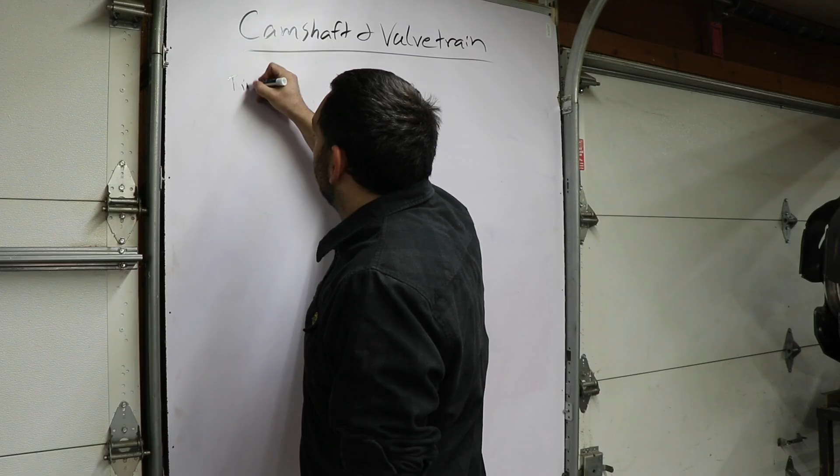The valvetrain consists of everything from the crankshaft to the valves. So as we go through the system, that's going to be our timing set, whether this is a chain or a belt, the gears, that kind of stuff. That's going to directly drive our cam, and our cam is going to have lifters or followers.

If we've got a lifter or pushrod style, next up is our pushrods. If we're overhead cam, usually our followers are acting directly onto the valve at that point, or if it's just like a lifter and bucket setup, it'll be directly at that point.

But if we're pushrods, we've also got our rocker arms, which would be the same as our followers if it's an overhead cam deal. And then now we're acting on our valve. These are the direct parts that the forces are moving through to get that valve to open.

But along with that, we've got our spring, retainers and locks, or seats for our springs between the spring and the head if we need them. Cast iron heads usually don't need them.

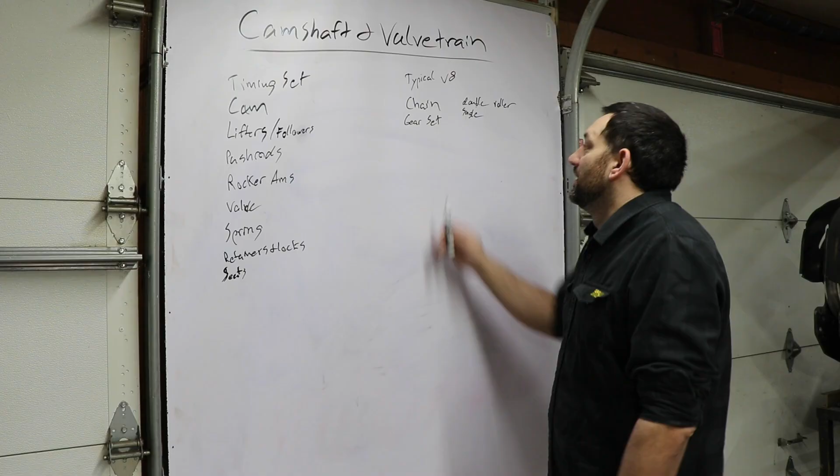You can still get gear sets. They are a lot more picky about how they get set up, like the spacing's got to be right. They're also noisy because they're straight cut gears, so that's why you get kind of a supercharger whine from them. And they even got different cuts where you could choose how loud the noise is, kind of a thing.

A lot of times this is not a choice we make nowadays, simply because a gear set like this also transfers harmonics. Now, harmonics being vibrations and just the way material is moving around of the crankshaft and rotating assembly moving makes a harmonic into that system.

Well, if we're gear driven the whole way, we've actually got metal touching metal all the way up to our camshaft, and those harmonics can travel up into the camshaft and therefore into the valvetrain. And I've never actually gone through the whole process of finding out, but plenty of people that have had way more time and money to invest into racing programs have seen and found that those harmonics can get up into the valvetrain and either break parts or cause valve float or just problems in general.

So really, a gear type set is not something we would choose in this day and age, but there still is kind of a place, especially for nostalgia reasons, or just because somebody wants to, as far as this stuff is concerned.

There's also a belt drive. Belt drives are definitely more of a modern introduction, starting out with OEM cars. You can still get chains and belts in OEM stuff there. It's just kind of what the manufacturer decided to do.

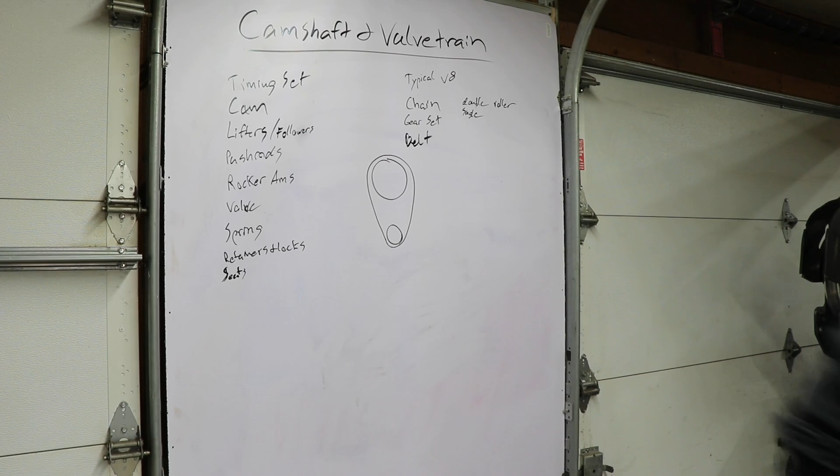The belt is probably a little better at being less flexy, just because the weight of the belt itself is much lower than the chain. So the inertia forces coming off of a small gear or crank gear to our cam gear, as we've got our chain or belt going around, everything's rotating in this direction if we're looking at it from the front. There are some engines that spin the other way, mostly in front wheel drive applications. I believe it depends on which way the motor's laying. Some spin the other way, but your typical American V8 is going to spin clockwise when looking at it from the front of the engine.

The belt or the chain has weight, and because the crank is turning, it's really pulling this edge very tight because of the drag of the valve train system and the cam itself. But when it comes around, we've got the chain weight, and if there's slack in the system—because there's always going to be just a little bit—it's trying to throw the chain out this way. The same thing happens with the belt, but because the belt is lighter, it's going to be thrown less.

In theory, what we're trying to do is make sure the slop in the system is kept to a minimum, because as this pulls tight, the chain or belt might actually start out—if it was not running—in a place like that where it's even on both sides.

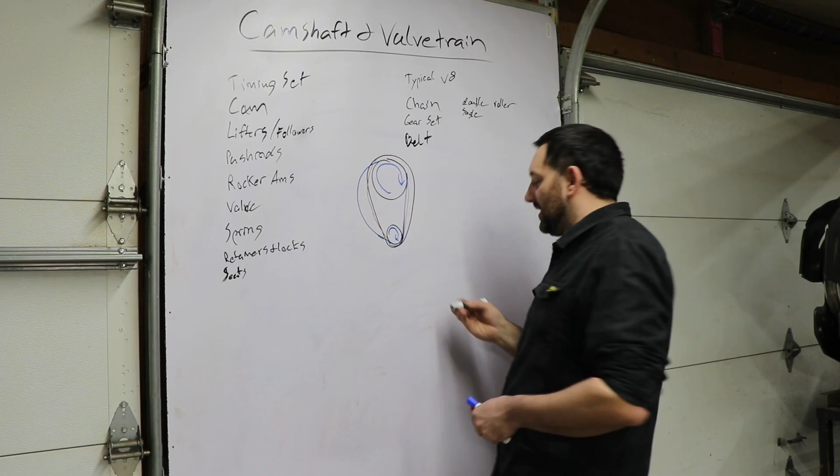As we're accelerating, we're pulling it tight, and we're getting slack on this side. But if we're lifting off the gas, slowing down, shifting a gear, whatever, now all of a sudden the crank is going slower than the valve train, and it reverses. We now get pulled very tight on this side, and we're being thrown with slack on the opposite side.

Now we're talking about trying to keep this to a minimum. It all depends on how the chain or belt fits, because there's a very specific center to center distance between our crank and our cam that is supposed to be maintained. But if we've done any machining to our block, whether it's line boring or line honing, we might be making this distance shorter, or maybe it was a little bit short from the factory—where now our center to center distance is short, and that makes more slack in the system.

Because of that, depending on the application, you can get some like minus-.005 or minus-.010 timing chains, where just one link is ever so slightly shorter, or however they make up that difference, to bring that in and tighten things back up. It's not super common to be needed.

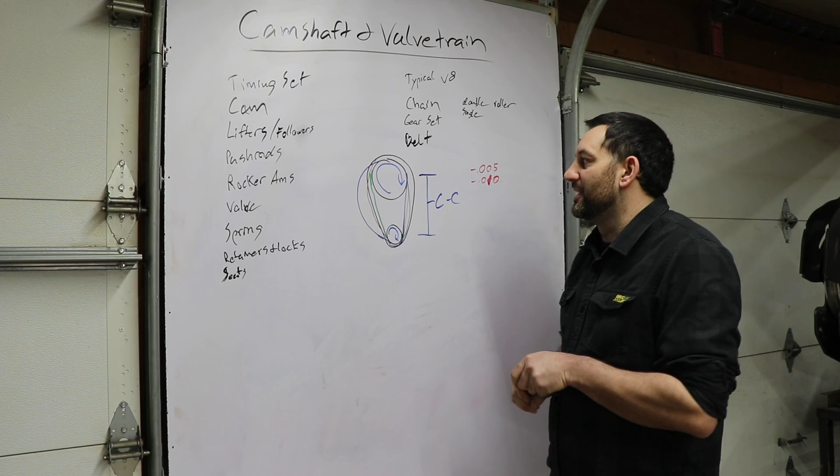Out of all the engines—I've probably built 100 engines over the years of different types—I think I only had 2 that I really needed to go to a shorter chain on, because there was just too much slack in the system, with the exception of a small block Mopar. Every single one of those is loose. You can't get a shorter chain, so they actually have an add-on OEM part.

I think it came out for the Magnums, but it fits on the older ones too—it actually puts a spring-loaded chain guide in, similar to an overhead cam setup. The overhead cam's got multiple guides, and it's just got a spring here that adds pressure to the chain to make sure it's always pulled tight. Actually that's a great setup because it takes up a ton of slack on a small block Mopar—so much slack that it would actually be considered junk on something else.

This was at least a thing 15 years ago when I was doing a whole bunch of them, and these were actually getting kind of hard to get. So I don't know what the situation is nowadays.

I've thought about trying to design something like this to add to my Oldsmobiles—not because the chain is loose, but because if we can add just a little bit of tension, we can control it that much better. And what I mean by controlling it is because of our slack, the way it's moving between acceleration and deceleration, we could be getting a couple of degrees of variation in our camshaft versus our crankshaft, ending up plus or minus—plus being we advance, or we retard on the camshaft.

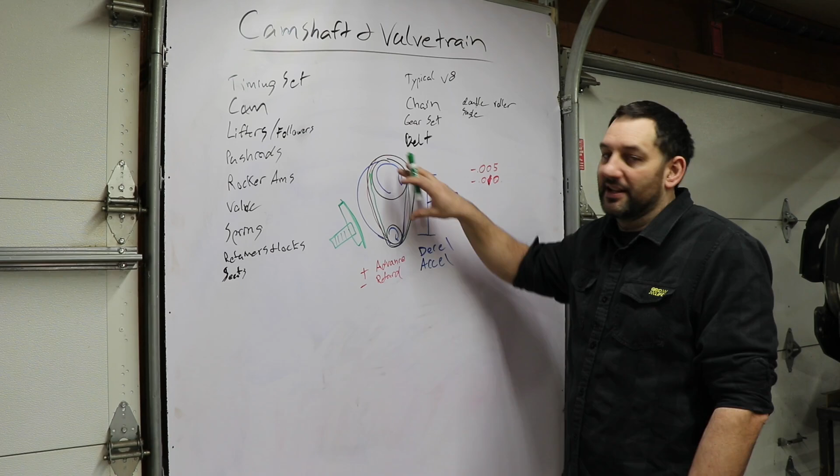It's variable valve timing, basically. Newer cars, like a newer LT style GM engine, do this advance and retard on the camshaft hydraulically, changing it so it can build a little more power, either low end or mid range, high end, moving it around. That's something they designed and probably did lots of dyno testing for, to see at what RPM the camshaft should be in relation, to maximize low to mid range power.

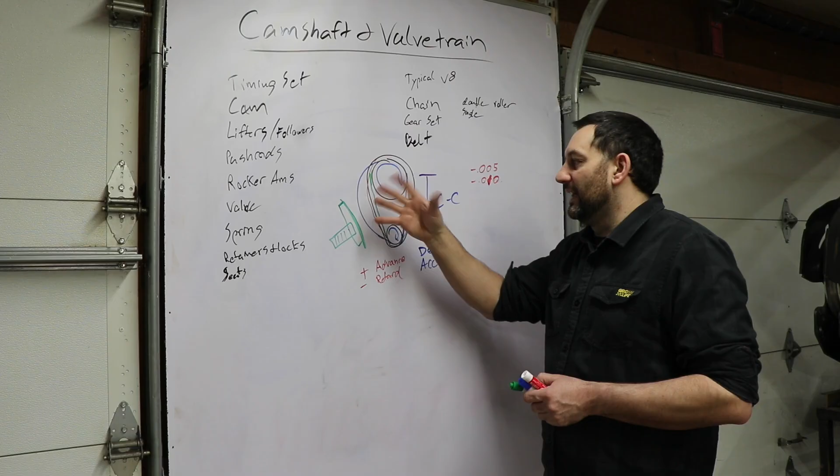But the big thing is, we're building a performance engine. We don't want it just willy-nilly going wherever it pleases, because especially at a steady state RPM, like cruising down the highway, you'll have a slight accel, slight decel. You may not notice it in the car, but it might be enough that it's just rattling back and forth if the timing chain is loose enough. It's not good for the engine as a whole, and it creates a lot of unnecessary movement in the system. So we really want our timing chain, gears, or belt set up so we have as little lash in the system as possible.

Now once we've got the energy moved up to our camshaft, and it's rotating in sync with the crankshaft, we need to know what our cam is actually doing.

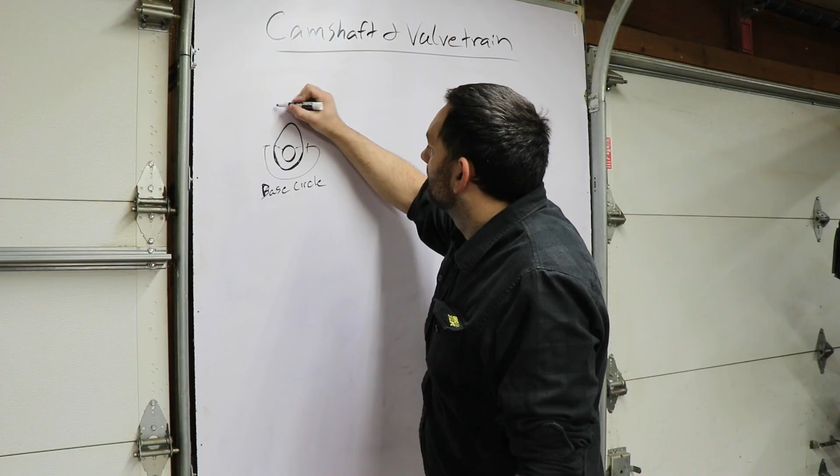A cam is just a shaft that has an eccentric lobe on it. This lobe area is what creates our valve lift. This area around the bottom that is not our lobe is called our base circle, and our base circle is just the area of the cam where the valve is closed. Our lobe is valve opening.

I'll start with the base circle, because this is where nothing is happening as far as that valve is concerned. Depending on the system our cam utilizes for controlling lash, we've got two different types: solid and hydraulic. These are the two different methods, with solid being nothing moves, we're actually going to have a set amount of lash, lash being just space in the system where our parts are not touching each other.

Hydraulic, our parts are always touching each other, and it's just the oil pressure that keeps them pushed in contact, but not so high that it causes a valve to open with that pressure. So here we have basically zero lash in the system, because all of our parts are touching.

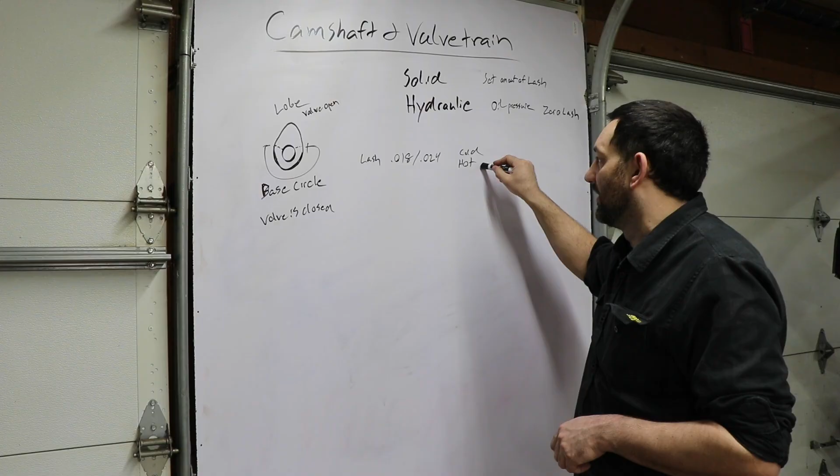The cold versus the hot takes into account the expansion of all the parts, like the entire engine. The block and the head are going to expand and contract with temperature, as will our timing set, camshaft, push rods, lifters, rocker arms, and valves. Everything expands and contracts with temperature, so this number changes based on whether you're setting it cold, not running, or with the engine up to operating temperature. Your cam will specify one or the other, if not both, as far as lash settings.

So with the two numbers, it's going to be 18 for the intake, 24 for the exhaust. The reason the exhaust is usually bigger is because our exhaust valves run hotter, and therefore grow in length a bit more than the intake valves do, making a difference there. There's just more heat in that part of the cylinder head.

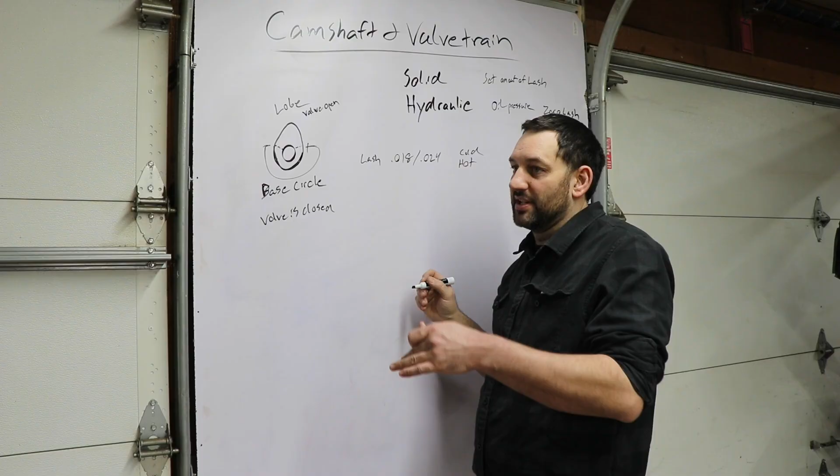Now for our hydraulic systems, since we're running zero lash, it's not just tightening up your rocker arm until your pushrod bottoms out with no more wiggle. That would be zero lash if we're using a solid system, and it's also zero lash if we use a hydraulic system. However, because we're wanting to use the hydraulic system, our lifter...

...has a couple of parts to it. There's a top portion that's got the cup that the pushrod rides in, and then there's a couple of parts, well, there should be one oil disc in there, I believe, and then a spring.

Now this usually has an oil port of some sort in the side, and that's getting oil supply from the block or the cylinder head or whatever, because even overhead cams sometimes have the lifters. They sit down the head and push up on the follower/rocker arm to hold it tight against the camshaft. So there's a couple different ways that all this stuff goes together. It depends on the engine.

But it's being supplied oil pressure from the engine, and that just fills up this reservoir space between this disc and our cup that's holding the pushrod, or that's a pin if it's an overhead cam follower, because it's got a pin sticking out the top to push on the rocker arm. And we're just filling that system.

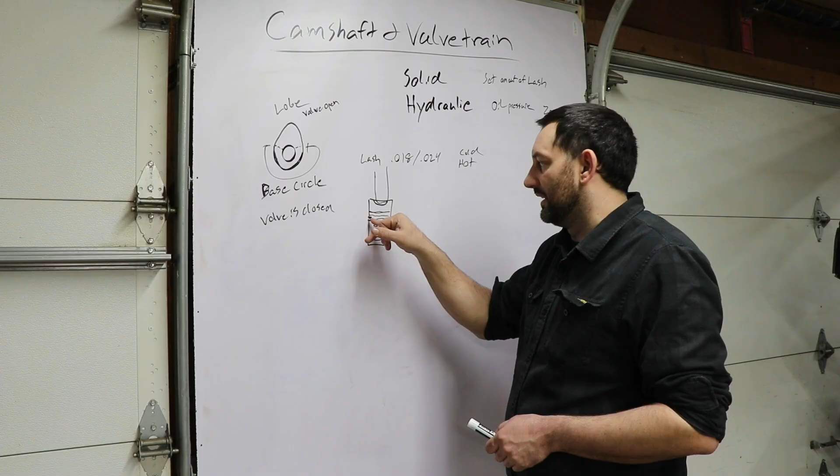The disc has a metering hole in it. It's a fairly small hole in the side of the lifter, and we're just metering the amount of oil that can get in there, filling the space so that our cup on top can't move up and down inside of the lifter itself.

But when we're first putting the engine together, if it's an overhead cam setup, you really can't adjust anything with that beyond being able to add shims in the hole below the lifter body, therefore raising it up, therefore depressing the cup further into the lifter. That's one way to adjust it to a tighter setup.

Otherwise, with a pushrod V8 system, we've actually got our rocker arm up on top. Then we're tightening it and pushing down on the pushrod to push it farther into our lifter body as well. It's accomplishing the same thing.

Typically we're going to be talking a quarter to half turn when we're talking V8 pushrod stuff. So all that is, we're holding onto our pushrod, tightening our rocker arm, and as soon as all the up and down slop goes away in our pushrod, it means we've finally got the pushrod to hit the cup, but the cup is still at the top of the lifter. Then we'll turn our rocker arm, polylock or nut, another quarter to half a turn to depress it into our lifter a little bit.

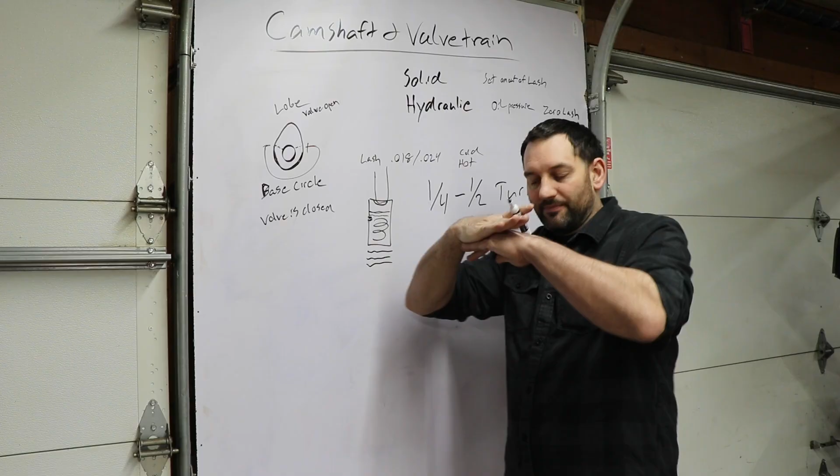Then when the engine runs, that fills with oil. It kind of locks everything in place. They're very difficult to compress after that. That's why it's able to open the valve, and that's because of the metering hole in the disc. It's basically locking the oil in place. It lets it flow in, but it doesn't let it flow out very quickly. So it locks it in place so that while the engine is running, it's holding in the correct position to open and close the valve without having any lash in the system.

These can be set tighter. I think the argument is, depending on how good the lifter is or what that metering plate size actually is, when you get into large performance camshafts the hole is probably still too big, or what's happening is we're getting spring pressures big enough that we're collapsing our hydraulics trying to keep our lifter on the camshaft lobe. So if you run it tighter, it can only collapse a little bit. But on that side of it too, you can also get into situations where it's not in its correct range, and maybe it'll lock and you're going to get slop in the system anyway, or it's not good for the lifters. You can just run into problems.

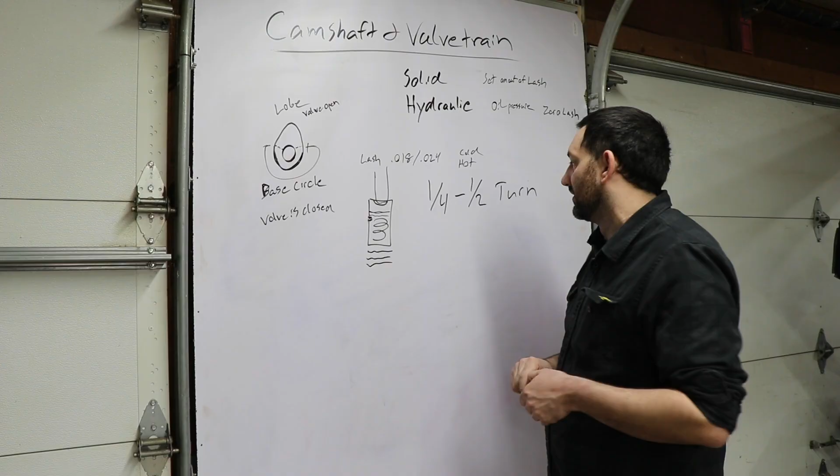The quarter to half a turn is a good place to be. I prefer to be to the quarter turn side, just barely depressed in there.

We make sure we get plenty of oil to fill it up, and that quarter turn buys us just a little bit of space to take up wear in the system over time. Because we're building a performance engine, it's not going to see 200,000 miles of use, so we're probably not going to see that much wear before it's back apart to check on it. But that's the benefit of a hydraulic over the solid: you've got no lash, so you don't have noise from the valve train. It's got its own built-in way to take up wear over time, and it's just an overall zero maintenance system.

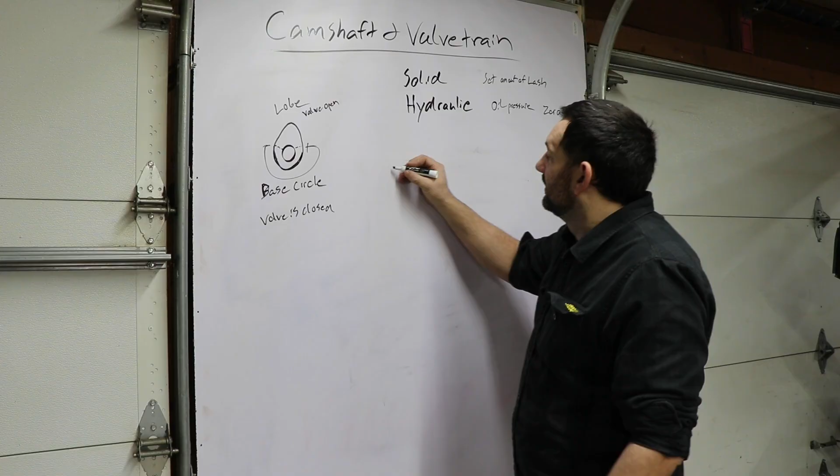Solid cams, on the other hand, we have our initial lash that we set. But it is adjustable because we're setting it. Now, why we might want to adjust the lash depends on what the engine wants.

So let's say we picked a cam that's got 256 degrees of duration at 50, and 264 on the exhaust, at 50 being at 50 thousandths of lift. Well, if we have lash that is 18 and 24 like it was before, but our cam has this duration, let's say it's 550 and 570 lift. So these are how big our lobes are from base circle to the top of the lobe, after factoring in the rocker ratio. So that's what we're going to see for valve lift.

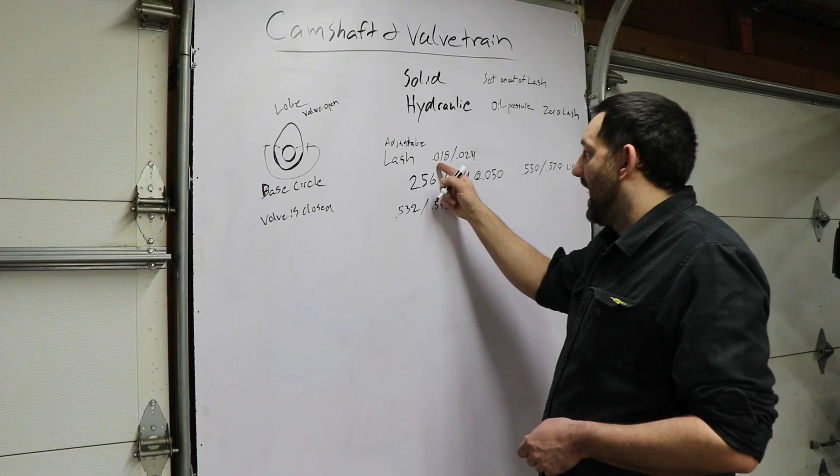Now let's say this cam is a little too big for our engine. We can increase the lash. But what's going to happen when we increase the lash is we're both going to reduce our valve lift, because there's more slop in the system -- slop being lash.

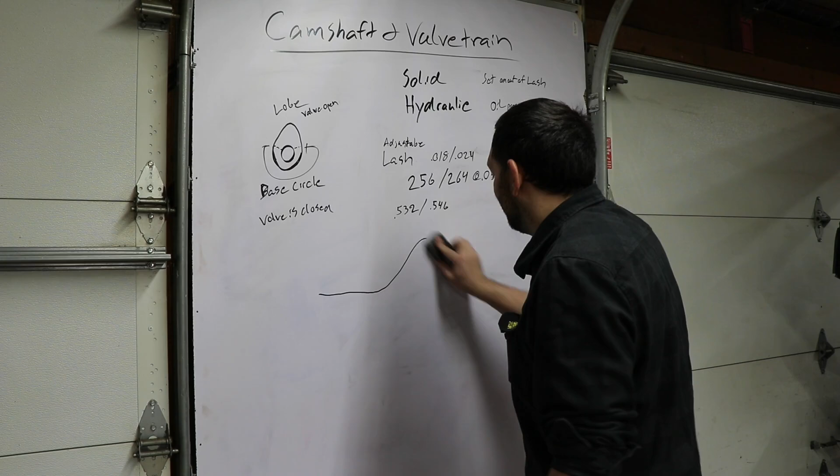And we're also going to reduce our duration. That may be kind of hard to think about, but if we take our base circle and our lobe and put it into a graph form, we've got our flat base circle, and we've got our lobe back to our flat base circle. I've drawn an asymmetrical camshaft lobe here, which is a thing -- they're not always consistent, but there's symmetrical and asymmetrical. Most stuff is symmetrical.

So let's say that this is what our cam profile is going to be with a hydraulic system. Since there's zero lash, it is going to be running exactly what this profile is. And this lobe in a hydraulic, if we put the same lobe on a hydraulic as we do on a solid, these numbers are going to be slightly different even though it's the exact same lobe, simply because we've got our lifter directly on this line to open our valve, versus when the lash is factored in.

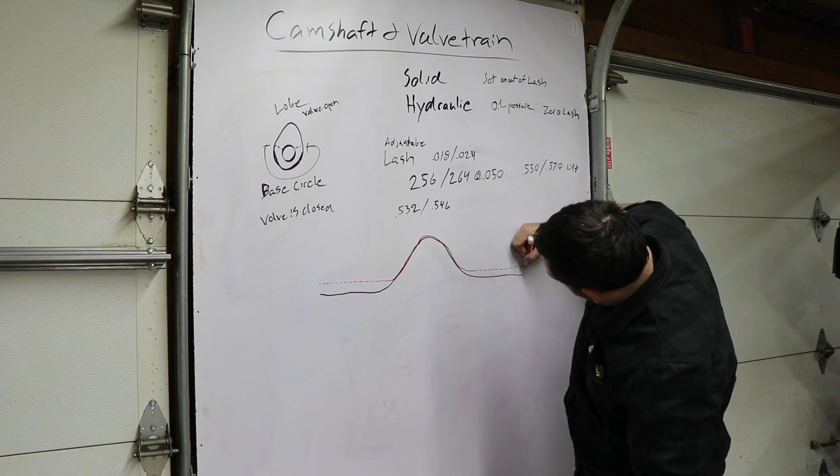I should use a different color. Our lash is doing this -- so this is our lash take-up. You can see when that lobe profile starts to actually open, we first have to take up our lash before the valve actually opens. So we're ending up with a cam lobe that's from there to there in opening instead of being from here to here. So that's making a different duration number.

And it changes the overall duration number because there's an at-50 number and then there's an advertised number. The advertised is always whatever your seat-to-seat is, or maybe it's measured at 2 thousandths of valve lift opening. So for this at-50 number, we'd probably have like a 292 -- I don't know, I'm just making stuff up here -- and a 300 advertised.

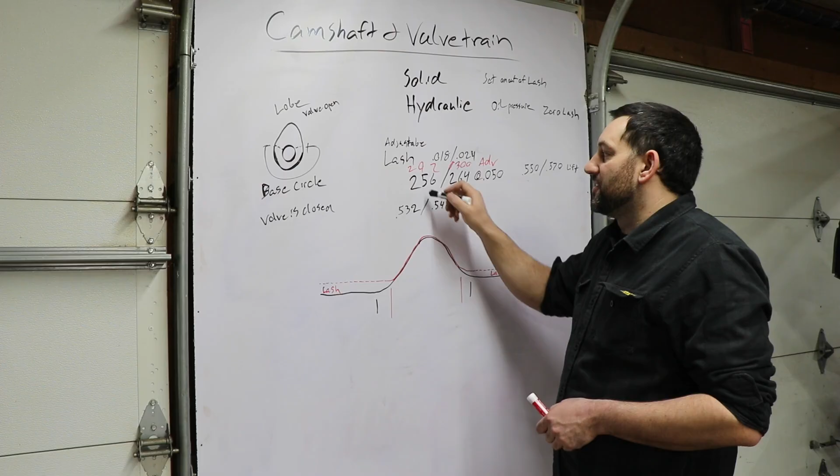So what this is telling you is that the difference in these two numbers is the amount of crankshaft degrees. They are the degrees of crankshaft rotation that we have between 0 and 50 thousandths of lift. So if we take the 292 minus the 256, that's 36 degrees. So what that's telling us is that, if it's a symmetrical profile, we have 18 degrees of crankshaft rotation that it takes for our valve to get from the seat to 50 thousandths of lift on the way opening, and 50 thousandths to 0 on the closing. So the tighter these two numbers are, the more aggressive the cam ramp profile is -- the ramp being this little area here.

The more aggressive this is, the harder it is on parts, and the softer it is, the easier it is on parts. You can think about it like opening and closing a door. A soft ramp profile is going to open it slowly and close it slowly. An aggressive one is like flinging it open and slamming the door shut. Obviously, the door that's opened and closed nicely is going to be easier on the door and the frame versus one that's being slammed all the time.

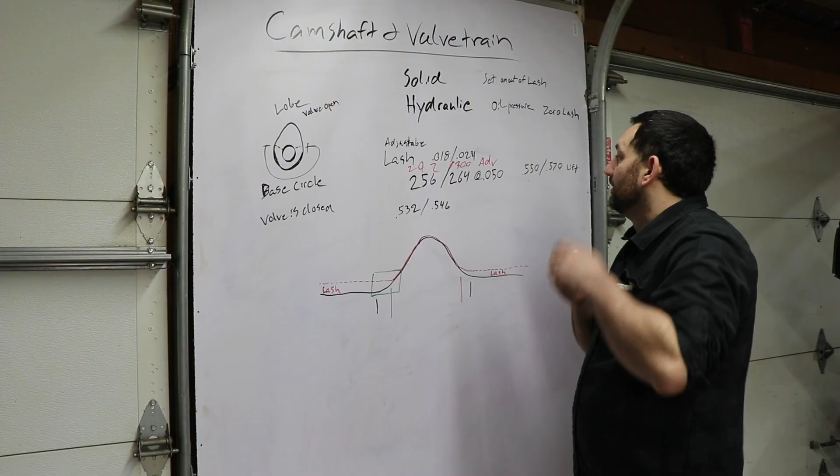Now circling back to our lash setting, this is adjustable, so we can either tighten or loosen it. I started out talking about loosening it because maybe our cam's a little bit big. So what that's going to do is we're actually going to add a few thousandths here, and that makes our cam lobe, the lift lobe section that it actually sees at the valve, become smaller.

So if we increase, say, 0.006 of lash, we're going to go to 24 and 30, which is really loose. Probably don't want to run stuff that loose, but this is just an example. We're going to end up at 526 and 540 for our actual lift.

But as you can see down here on the drawing, we're actually just ever so slightly smaller again. So our duration at 50 is probably going to turn into like 253, 261 at 50, because we've just effectively made that camshaft smaller by increasing lash.

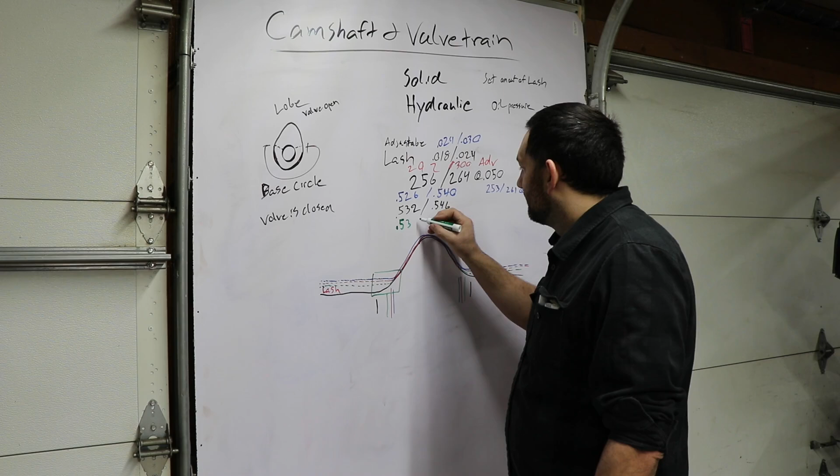And let's say we went the other way, so now we're going down to 12 and 18. Now we've increased our valve lift. We're also going to end up with a little bit more duration out of it, just because of where we're starting to put our lifter in contact with the cam to open all the parts.

This is a real interesting thing to actually play with on the dyno, because you are making a direct effect to the camshaft without actually having to take everything apart and change the cam. Sometimes the result, the dyno will always tell you what the engine wants, because it's either going to make more power or it's not going to care. When we get later into a dyno testing video, we'll go over a lot more of that stuff, because the dyno's kind of the final say about whether you're doing the right thing or the wrong thing.

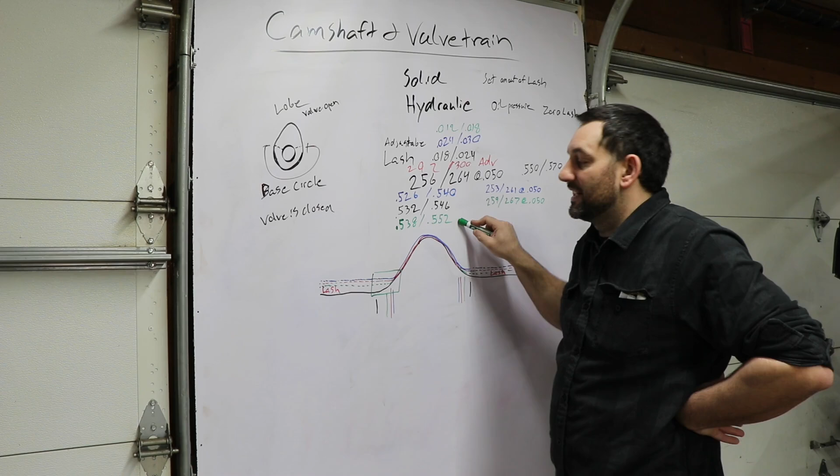But the cool part is when you have a solid setup and you can do back-to-back dyno runs, this is something that can be adjusted in a matter of popping the valve covers off of a V8, readjusting a lash, and you can do another dyno pull in, say, 20 to 30 minutes, and it doesn't cost anything other than the time to do it. So it's pretty cool to be able to play around with this stuff and see whether something cares.

The ramp profile is not the same on all cams, because the actual ramp is part of the lobe shape, and there are all kinds of different types of lobes. There are different types of aggressiveness of ramps and lobe sizes that do determine what you can use as far as the type of cam. So really we've got flat tappet and roller.

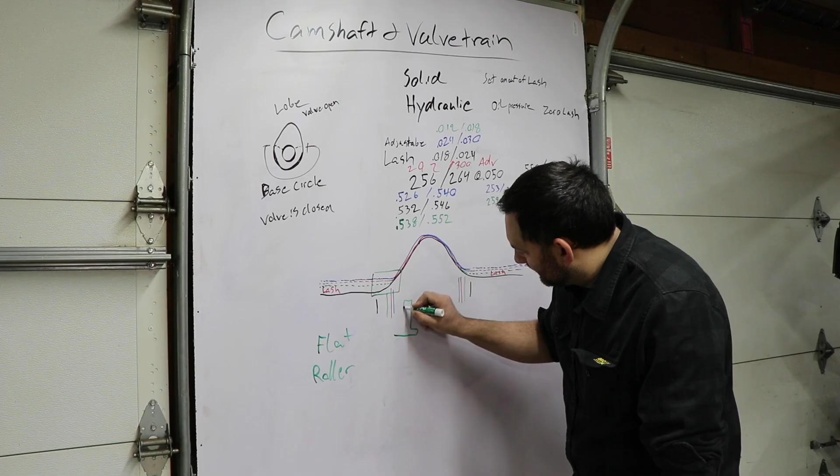Flat tappets, just to draw a super old school one, are basically just like that. The cam pushes onto this not-flat surface—there's actually a crown to this surface, and it rides offset on the cam. With flat tappet cams, the lobe actually has a taper ground into it. It's obviously not this aggressive, but there's a taper on there that then rides on this crowned surface on the flat tappet to make sure that it spins, so it doesn't make just a wear groove where they grind each other together. It needs to spin to let oil and stuff up in there for lubrication, and it also spreads out the load so you're not just wearing on one tiny little point all the time.

But the flat tappet can only be so aggressive, because if you think about it, traveling along onto this ramp, you're kind of like pushing a corner into it.

So more modern lifter, the hydraulic lifters like we drew earlier, are just more squared off. It's the same thing, got a little bit of crown. But if they're riding on this lobe...

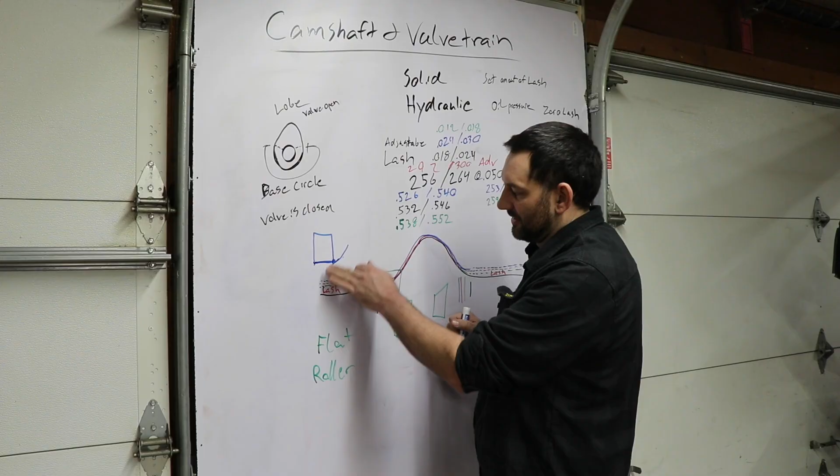and it starts to open, it can only open so aggressively before this sharp corner digs into the lobe. It's not as aggressive in real life as this is trying to visually show you here, but our cam lobe is coming around, our lifter is fixed, so it's trying to push up into it and make it do this motion. Well, it can only get so aggressive before it ends up contacting the corner and we've got a problem. So flat tappet cams are always lower lift, softer ramp angles.

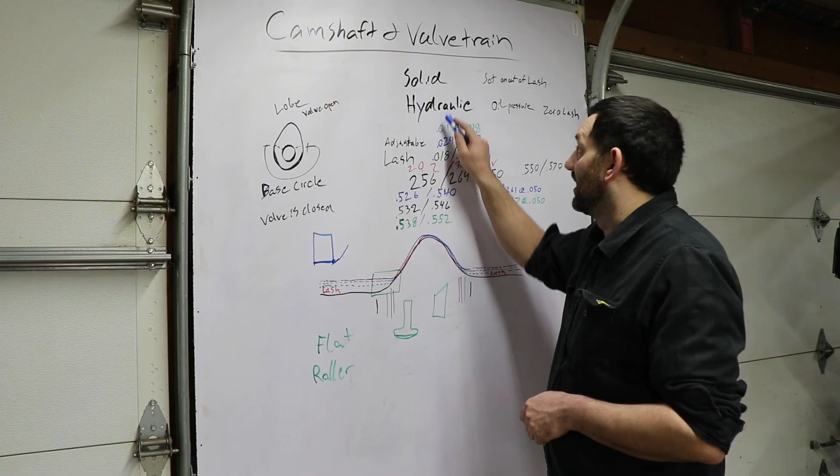Now you can get fairly aggressive ones. Solids definitely get into significantly more aggressive profiles than the hydraulic ones do. But there's still a limiting factor there, mostly due to our ramp-in area. Once it's up on the lobe, you can be a lot more aggressive because we're already riding up higher onto the lobe as it goes around in this area. But it's getting it off the seat up to starting lift where that really comes into play about which type of cam it is.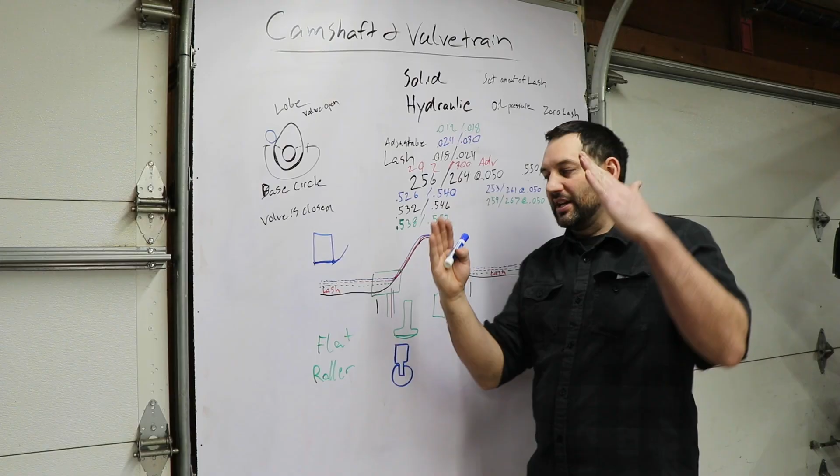Now with a roller, we've got our lifter body and it has a wheel on the bottom. So this wheel rides on our cam lobe, and even if I just draw a wheel on the side there, it's pretty easy to visualize that this is going to have a much easier time going up and over that lobe, and it's not going to have any corners pinching, because of the size of the wheel and the size of the lobe, we've got two bigger arcs coming together where they can kind of go over a lot of stuff.

You can think about it if you're aware of the off-roading world. Bigger tires go over things easier because they have a larger diameter. They can climb up and over other large things easy. Therefore, our roller cams can get way more aggressive on our ramp-in and ramp-out.

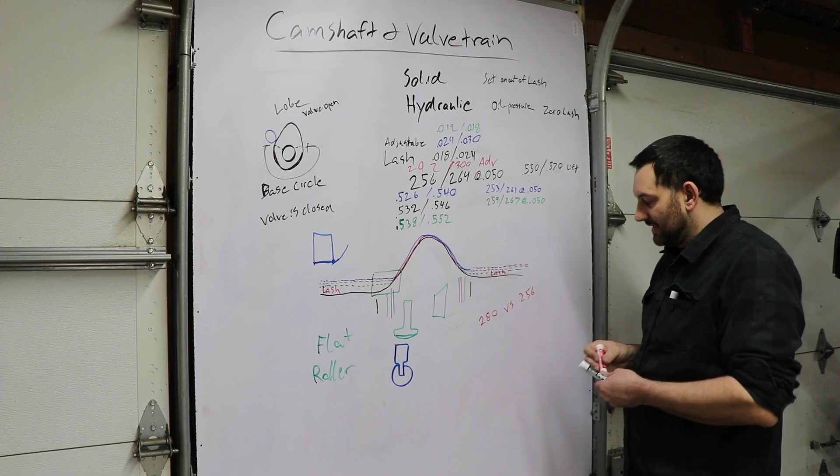And that's where, if we keep using our example up here, our 292 versus our 256, on a roller cam those can get tightened up, or maybe we've got a 280 versus our 256, or maybe even tighter. But the big thing there is, if you look at that, we ditched 12 degrees of crankshaft rotation in this area where everything up here is exactly the same.

So if you're drawing these lobes out on graph paper, the number of squares below the lobe line and above the baseline—the bigger that number is, the more valve open time we actually have. Now, the time in crankshaft degree rotation might be exactly the same, but the more squares we have translates to the valve being open longer at a higher lift. So that is area under the curve.

Because we can have two different lobe profiles that have the same advertised duration, the same at .050, but because the shape is different above .050, they can make pretty drastically different power. Say one valve averages a 200 thousandths opening, an average lift of 200 during that time, but the other one might average 280 of valve lift opening. Well, when we get into our cylinder head topic, the amount of airflow difference in that 80 thousandths is pretty big. But it's not just happening at these airflows—we're having the valve up at higher lifts, which means higher airflow for longer, even though a whole bunch of our cam specs might be exactly the same.

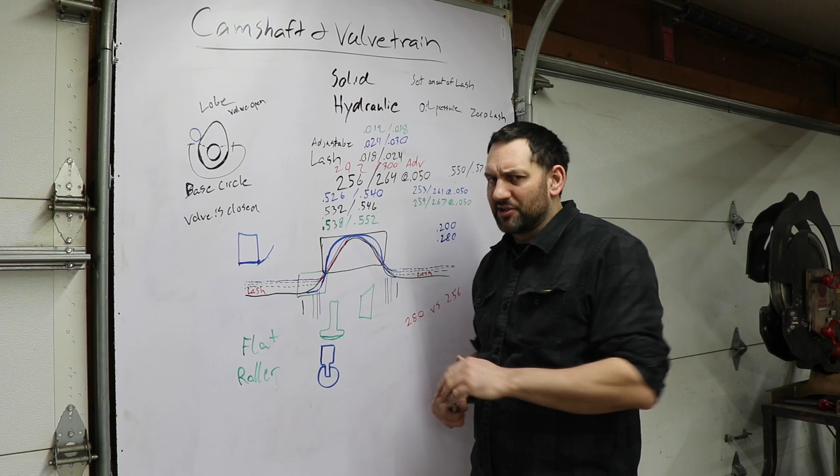Especially with the technology that was available 20, 30, 40 years ago, very much the wrong answer. More modernly, especially when we're getting into roller cams, because of being able to get way more aggressive on profiles and stuff, that's still not the answer. I'm willing to go a little farther down the page, especially for street applications, but it doesn't exactly have to do with the size of the camshaft as far as it being put on the page based on advertised duration. Why I'm willing to go farther down the page is because of our roller cam profiles.

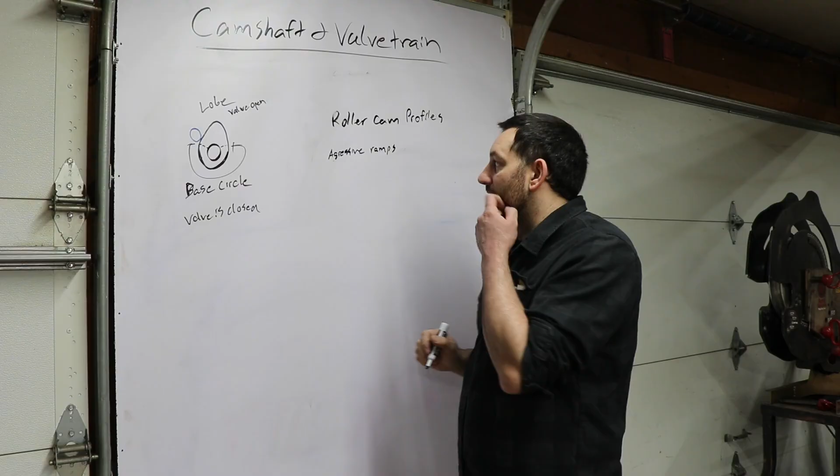As we talked about, the roller cam can be way more aggressive in the ramp area without causing a ton of wear and tear on parts. This aggressive ramp is really the secret to what I'm about to explain.

With our flat tappet, say we got a 236, 242 at 50. A cam that size is probably gonna be around 520, 530 lift, and it's probably gonna have like a 270, 278 advertised duration, just as an example.

Now let's say we've got an engine together. This is the cam that has been in it. We like the power it makes, we like how it behaves. Don't underestimate the word behaves, that's actually very important, because your camshaft is the brain of the engine, and all of those things we've been talking about decide the behavior of the engine.

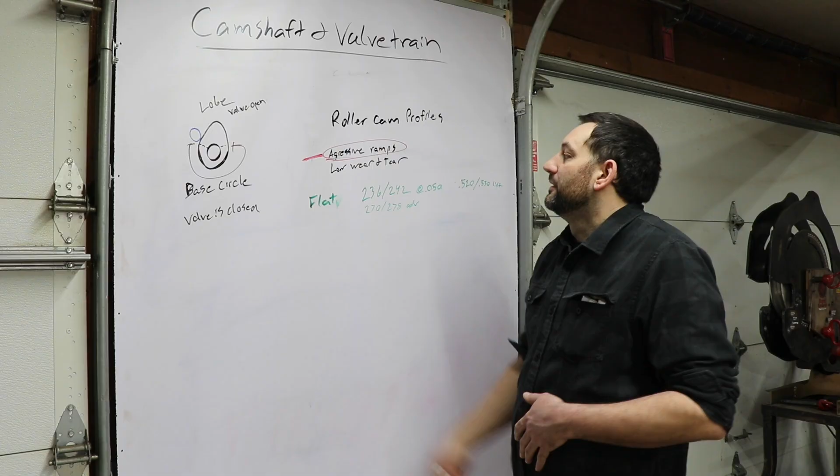Now let's just assume that we like the power this cam has been making in the engine. It is, however, a little rough at idle, low speed, light throttle accelerations maybe not that great. It doesn't get terribly great fuel mileage in a cruising scenario because you end up needing to use a little more throttle, since it's just not very efficient with the way it's utilizing its air and fuel, because the cam duration's a little bit on the big side for the engine since it's a smaller engine. There's some things we don't really like that much going on here, but overall it's not a bad cam.

Now if we go to a roller, we can pick out a cam that is the exact same 236, 242 at 50. So really, we're picking the same at-50 number, so we can assume that we're going to be very similar in actual performance out of the cam, as far as the power band type of behavior between these two cams.

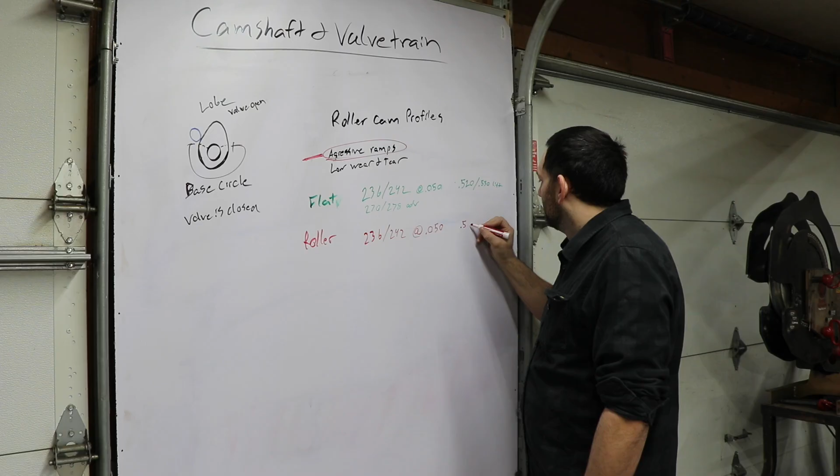However, at that duration, we probably got a 560, 575 lift. So now these two numbers together tell us that our roller profile has a lot more area under the curve than our flat tappet does, because we've got more valve lift at the same at-50.

So once the valve is already opening, that's the direction we're going, or the valve is closing, that's the direction we're going - we're into the meat of that profile on the graph, and we're going to a higher lift along the way. So we got to draw our base circle and our flat tappet profile versus our roller.

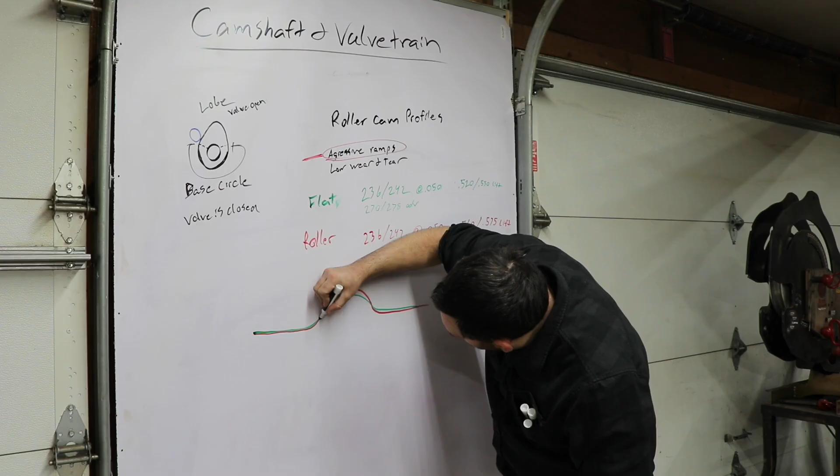So you can see these two points here are at 50. Did not change, they are exactly the same on both cams. Same. But because we're higher lift, we've got way more area under the curve with that.

But now the next part of that is our advertised duration. Because we're roller, because we're more aggressive, we might be down to a 260, 268 advertised. So we've shortened our actual cam size, seat to seat on valve opening, by 10 degrees on both lobes.

That means that the valve is closed for 5 degrees longer on both ends of the lobe. So as far as our exhaust goes, we're on our power stroke, piston's coming down, the exhaust stays closed an extra 5 degrees of crankshaft rotation. That's making our power stroke longer. It also closes our exhaust valve 5 degrees earlier and opens our intake valve 5 degrees later.

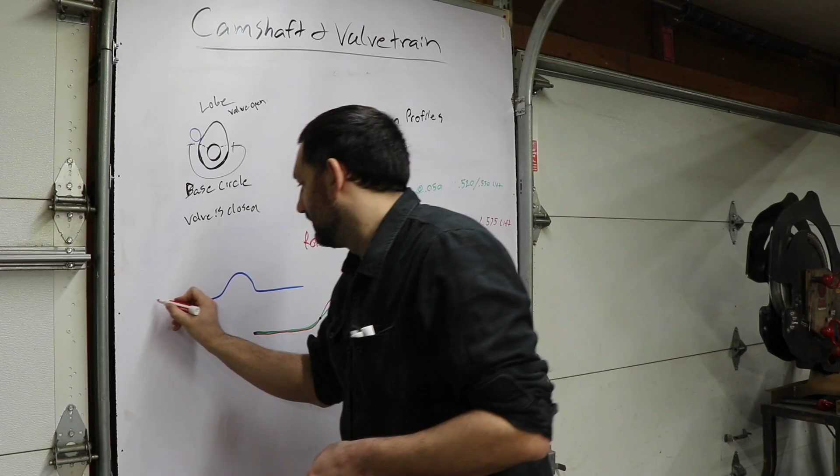So where that's coming into play is where we've got overlap. Overlap being we got an intake lobe and an exhaust lobe - this area is the overlap.

Overlap is important because the exhaust gases are exiting the cylinder at a very high velocity, and we want the intake valve to open up at a proper time where that velocity and inertia of the exhaust gas leaving the cylinder helps pull the intake in a little bit. Almost kind of like a self-supercharging effect, if you will, where the one leaving is helping pull the next one in.

Now, if this becomes fairly big on big cams, it can dirty up the air-fuel mixture, because it might be where the exhaust loses too much velocity and then leaves some exhaust in the cylinder. Or it's still got high velocity, but now it's sucking fresh air and fuel out the exhaust valve because it's still open when it's starting to fill the cylinder up.

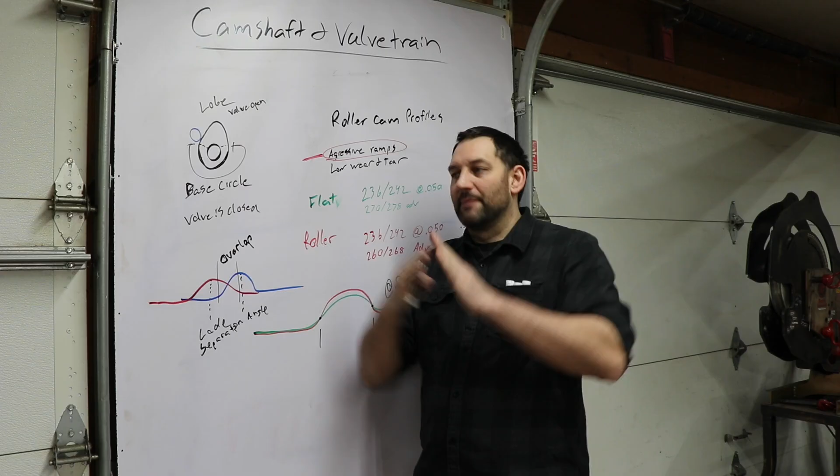Angle being just the number of camshaft degrees between the center of both lobes. The closer they are together, the more overlap. The farther apart they are, the less overlap. But for the sake of our camshaft comparison here, we're going to assume that the lobe separation angle did not change. They have the same LSA.

Our overlap isn't going to change other than the fact that it got a little bit shorter on both sides. So where I'm going with this is that our flat tappet cam had some drivability issues at low RPM. There's a chance that was being caused by too much overlap, and we were losing efficiency at low RPM because of it.

So we go to our roller cam and that advertised duration gets shorter. It means we're reducing our overlap even though the lobe separation angle didn't change, and we're going to be cleaning up some of that dirtiness at lower RPM. But that's not the end of all our benefits either. We've also still got that 5 degrees shorter on our intake closing, which then makes our compression stroke longer.

So really what we're ending up with by doing this swap is we have more lift, more area under the curve, longer compression, longer power stroke, less overlap, and all of these things add up to this roller cam making significantly more power than the flat tappet did.

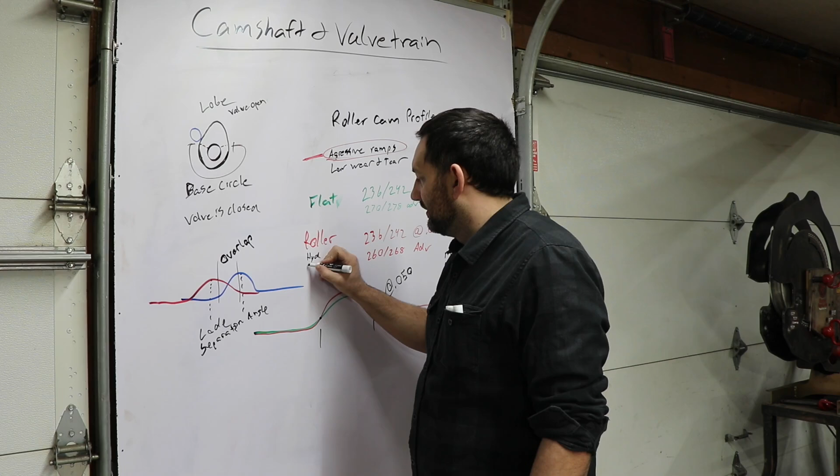Now, for less than super popular setups, a great example of this would be my Oldsmobile. There's two types of roller cams: there's a hydraulic and a solid roller, just like there's a hydraulic and a solid flat tappet.

And just like the flat tappet is less aggressive than the roller, the hydraulic is less aggressive than the solid. Now, I've got a situation with my Oldsmobile stuff where the hydraulic lifters that are available are in the not really great quality category, or at least they haven't been. I have heard some stuff that there's some newer stuff in the last couple of years that is better. But the workaround for this in a street application is quality solid lifters and a hydraulic roller cam profile.

That may sound weird, like it doesn't make sense, but what we're doing here is using the hydraulic roller because we need the roller for the quality of the cam, the hard core, so we can run a roller lifter on it. You cannot run a roller lifter on a flat tappet cam, because of that taper on the flat tappet versus the roller squared up to maximize surface area. Don't even think about trying it. But that's the same when you're talking roller to roller.

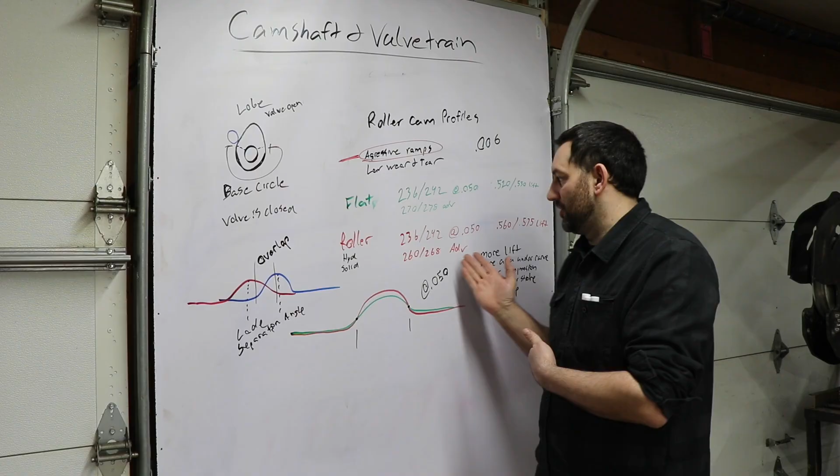I mean, there's camshafts that are in the 320 plus degrees of duration for advertised, and they're still like at or just over 300 degrees at 50. Those are absolutely massive cams for a small engine. They're so big they probably wouldn't even run very well. But on a 600 or 700 inch big block Chevy or Hemi, not a problem at all.

So especially when you start getting into camshafts that big, the compression ratio needs to be much higher. And then, like we were talking about, where the comparison between these two, we're gaining a little bit of power stroke, gaining a little bit of compression stroke. The compression stroke is not nearly as important when you're having a, say, 16:1 compression ratio versus a 9:1 compression ratio, because the amount of compression to get that air and fuel to where it needs to be to burn properly, the amount of crankshaft degrees that translates into is a way smaller number at 16:1 compression than it is at 9:1 compression.

Like we were talking about with our lobe separation angles, between the intake and the exhaust and how they overlap. The way camshafts are ground, those can be moved one at a time, or both at a time together. It all just varies, and I'm not going to dive too much into that. The big thing is there's arguments about how it makes power with what is actually just the lobe separation angle, so the LSA.

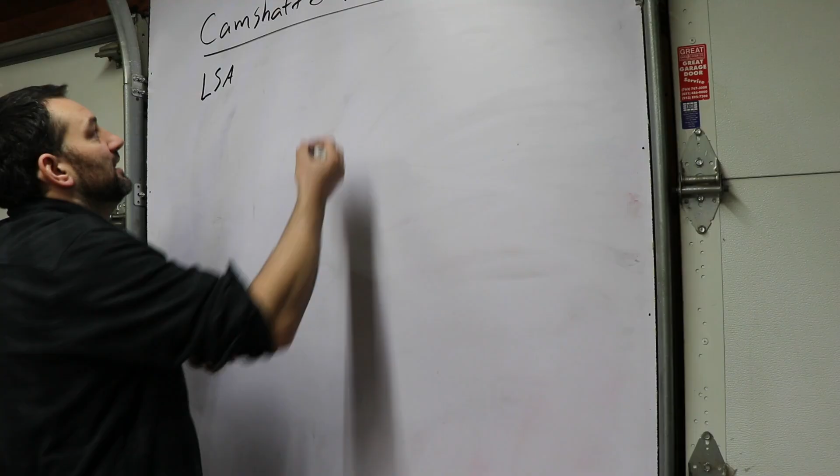Now, the rule of thumb, typicalness of this, is closer together, so a smaller number, is going to be a little bit peakier power, and wider becomes more of a broader torque curve. Now these are generalizations. It's not going to be the exact case in every scenario, but if we're looking at like a dyno graph, the example would be, our power coming up, makes kind of a nice big number, and it comes off, versus coming up a little bit earlier and more of a power curve like that.

But there's so many other factors into this that this is just a rule of thumb generalization. There's no reason you can't make either one of these power curves with any lobe separation angle, simply because of all the other factors that play in. Now a smaller, tight lobe separation angle might be like a 104, and a bigger one might be a 112. I've seen smaller than that, I've seen bigger than that.

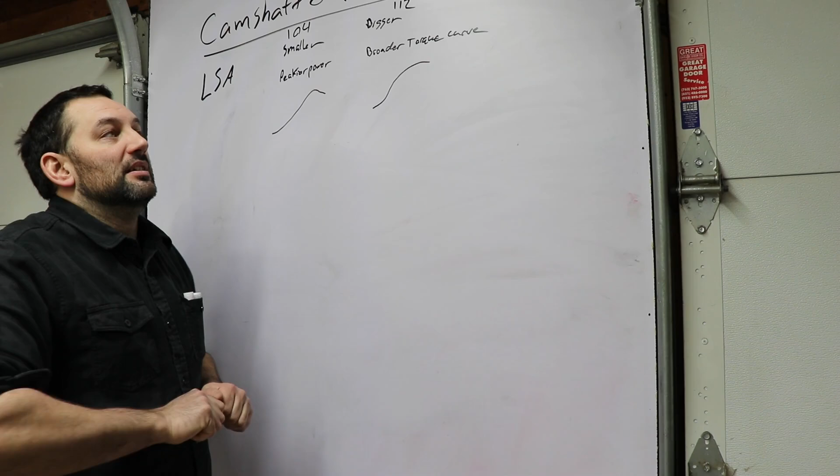Really, this stuff is getting a lot into the weeds, where, unless you've got the time and the money to buy a lot of cams and really do a ton of testing with this, you're probably better off discussing it with a camshaft manufacturer, or a builder that has had lots of experience with an application very similar to what you are trying to build, to get a recommendation on one or the other.

Now the intake center line is how we're timing the camshaft to the crankshaft with our timing set, like we talked about earlier. So this is just the relationship in crankshaft degrees compared to top dead center of number one piston. Now I've got a cam card here that we're just going to pull the specs off. This cam card has a 109 for intake center line. Center line being when we've got our camshaft lobe, where the middle of it is.

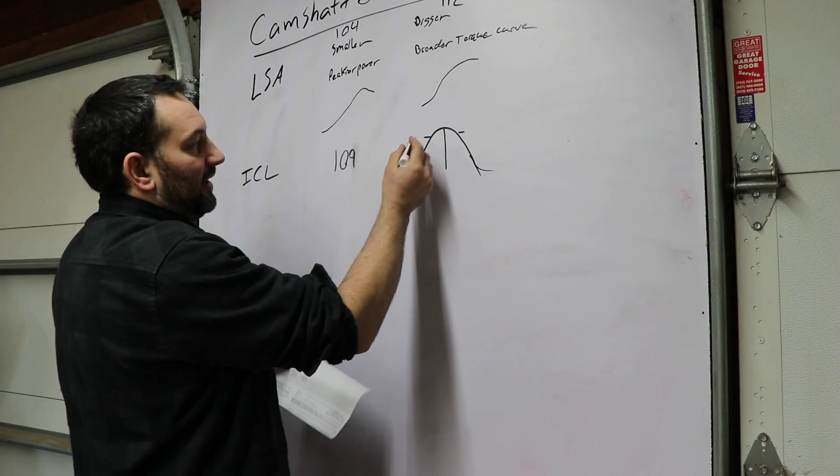And you find this and check it by, say, putting a dial indicator on your lifter or your bucket or wherever you can actually reach it at, and you just pick a lift number that's on both sides. So you want like an opening and a closing, and when you have a degree wheel on your crankshaft, you're then able to check both of those numbers and find the middle that way.

So if we're doing this on a V8, we're going to have a pretty big degree wheel mounted to our crankshaft, and it's going to have hash marks, timing marks, all the way around it, 0 to 360. Well, we got our cylinder coming up. We're going to put our number one piston all the way up at the top. That is TDC, top dead center.

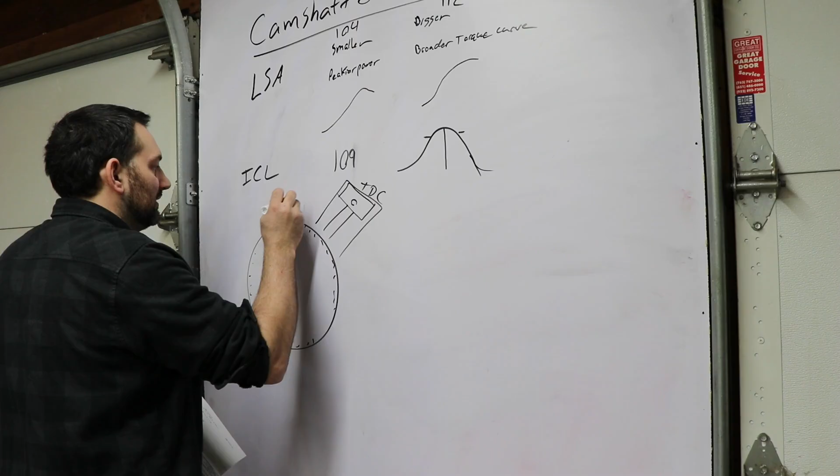Now this wheel can be turned, and we're going to want to put an indicator on it at TDC, and we want that to be 0. Now finding our intake center line, we're going to rotate it past. So it's going to be rotating this way, counting up, 1, 2, 3, 4, blah blah blah, going this way.

Well, we want our camshaft to be rotating, and we're checking that lift and finding this center line at, let's see, 109 down here somewhere. So we're going to turn it, and then our piston's going to be coming down. 180 would be our piston all the way at the bottom. So we're going to be 109 degrees of crankshaft rotation, pulling our piston down, where we're going to find the center line of our intake.

So as our piston's coming down in the cylinder, that is our intake stroke happening. So we're in this portion of the camshaft lobe. It probably already opened before we got to top dead center - that was our overlap section. So now as the piston's coming down, we're into the meat of our intake stroke. So at 109 degrees we're hitting center - that'll actually be a little bit past 90, a little bit past the piston being halfway down.

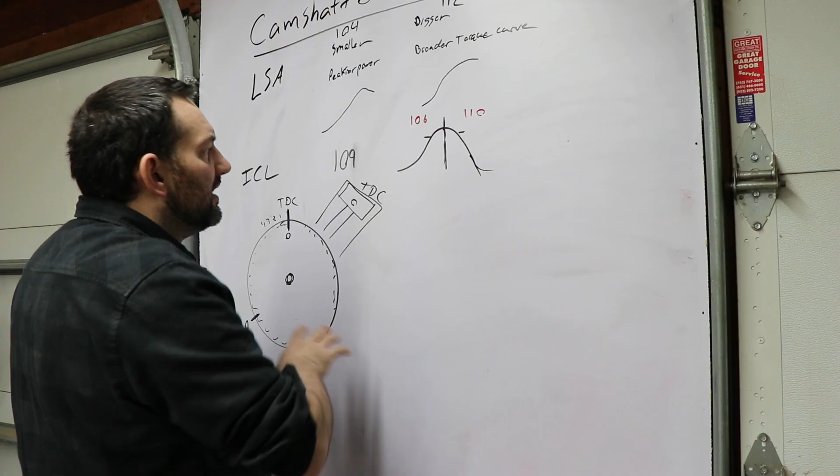And that's where our timing gear set, if it's got different keys, we can advance or retard with the timing set. There's also some where you'll have adjustable cam gears where you can loosen up some screws and rotate the camshaft relative to the gear itself. There's also setups where there's a pin where the gear gets an oversized hole and then you can use an offset bushing. There's plenty of different ways that the gear sets and timing sets themselves are designed to make the timing adjustable so that we can put the camshaft where it was designed to be relative to our crankshaft.

Now, if where we end up running it at is 106 versus our cam specs being for 109, then that is the camshaft being advanced. And if it's 110 versus that, it would be retarded. It just means that our camshaft relative to our crank is either ahead of the crankshaft or behind the crankshaft from where it was designed to be.

Now, much like our lash settings, there can be advantages to advancing or retarding the camshaft relative to the crankshaft as far as the performance of the engine. Really, this is something you probably shouldn't be playing with unless you're doing dyno testing or have dyno tested data to back up that decision, because it's not always the case.

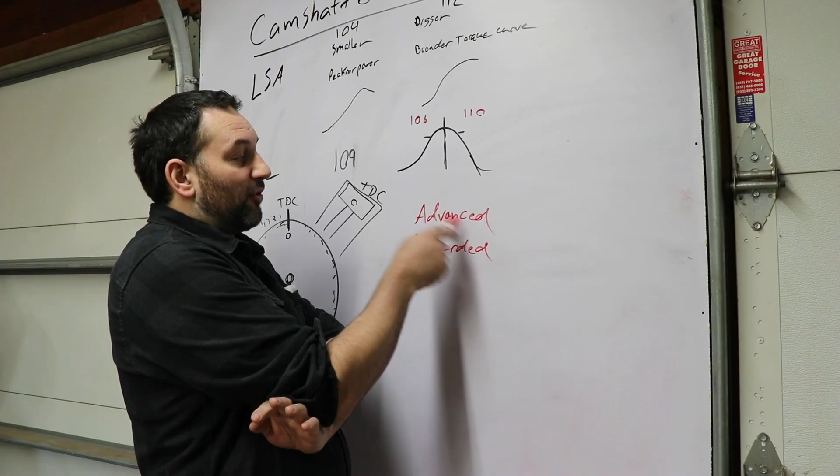I've had different engines on the dyno where we tried to either move the camshaft forward or backwards to make sure we had enough piston to valve clearance in something that had really high lift cam. In that situation, we were forced to run the cam retarded because we needed clearance for, I want to say, the exhaust valve.

So we were forced into moving the camshaft, and in that particular case, we ended up tight on piston to valve clearance because we milled a little more off the heads. We upped the compression, but the cam ran retarded, and it didn't make a power difference. It moved the RPM a little bit, but not enough to be worth doing. So we did not pick up power from our compression because our camshaft wasn't ideal for that. We lost the compression power somewhere else in the system with the valve timing.

I've also had different engines where we had an adjustable cam gear, built up where we could go plus or minus 6 degrees. We started with it at 0, right where the cams were supposed to be. We went full advance, full retarded, no power change whatsoever. It was just that's the power it was making. It didn't care where the camshafts were at. I really couldn't tell you exactly why that was the case on that particular engine.

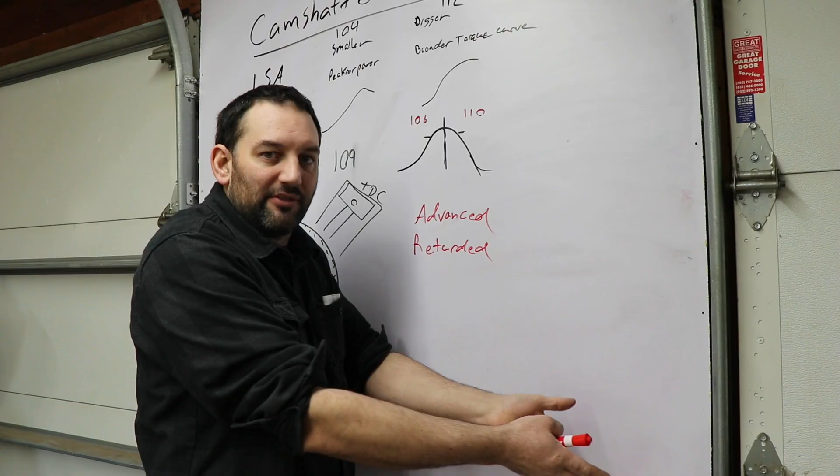Although that engine was supercharged, and the cams were still fairly small because it was a 4-cylinder, 4 valves per cylinder. So we were getting probably all the air we were gonna fit in the cylinder regardless of whether the cam was advanced or retarded because of our supercharger. It was just filling it up, like, yep, that's what fits. When the valve closes, whether it was 6 degrees advanced or 6 degrees retarded, we weren't getting any more air and fuel in the cylinder anyway, and it didn't change power because of that.

It maybe should have made a little bit of difference on the exhaust side, having a little longer power stroke or not. But at the same time, chances are we had gotten all the power out of our combustion cycle before the valve was opening anyway. So delaying the valve opening wasn't gaining us anything because all the actual combustion pressure was fully utilized before the valve opened as it was. I think that was a very unique situation.

I'm telling you this because it comes down to going one way or the other based on generalizations: advancing helps at lower RPM and retarding helps at higher RPM. However, it is very engine dependent. There are so many other factors that play into this that you could be helping yourself, or more importantly, hurting yourself, or doing absolutely nothing, even with a huge swing. Unless you're on the dyno back-to-back testing this, you don't know, so you might as well just put it where the cam manufacturer designed it to be put at.

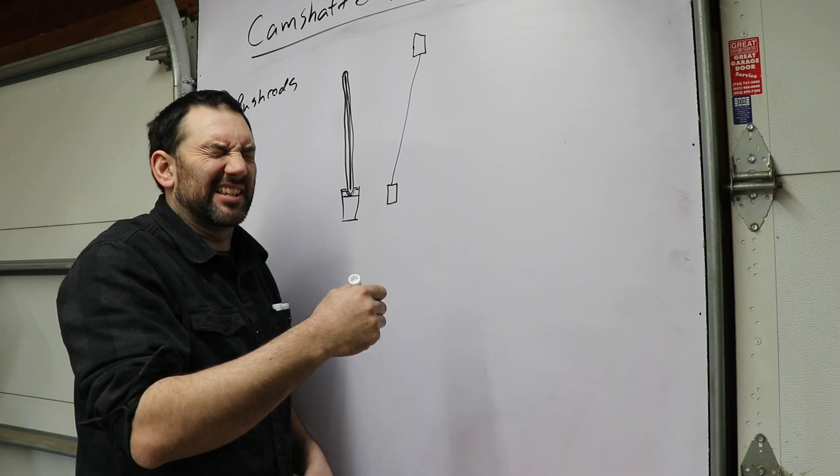There's even some Mopar stuff where it's got a pretty heavy angle. GM V6, early-to-mid 90s stuff, like the 3.1, the 3.4, very aggressive pushrod angles on those. And that's okay. The big thing is we're moving up and down here, and we want the rocker to move up and down. That being said, because it's almost never directly a straight line - this can be angled like we're looking at the valley of the block, and this could also be where we're looking at it from the front of the block, angled one way or the other.

Typically, if we got our camshaft here and our lifter going up at what's typically a 45-degree angle - but that's not always the case, they can be different angles. Our pushrod might be at an angle like this to get up to our rocker arm. Again, small block Mopar is pretty aggressive on this angle. Some of their heads have offsets where there's probably a little less, but small block Mopar is pretty aggressive on the angle like this. The Oldsmobile stuff's got a bit of an angle too, as do most of the others - your small block Chevys, your small block Fords, your LS - everything's got a little bit of an angle.

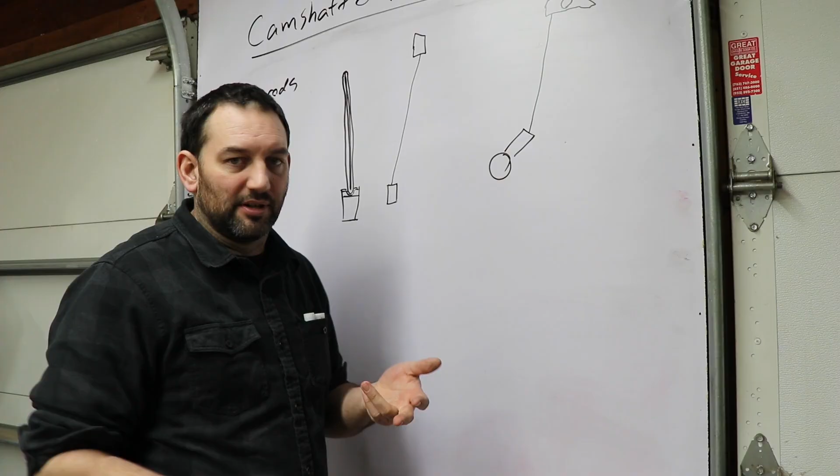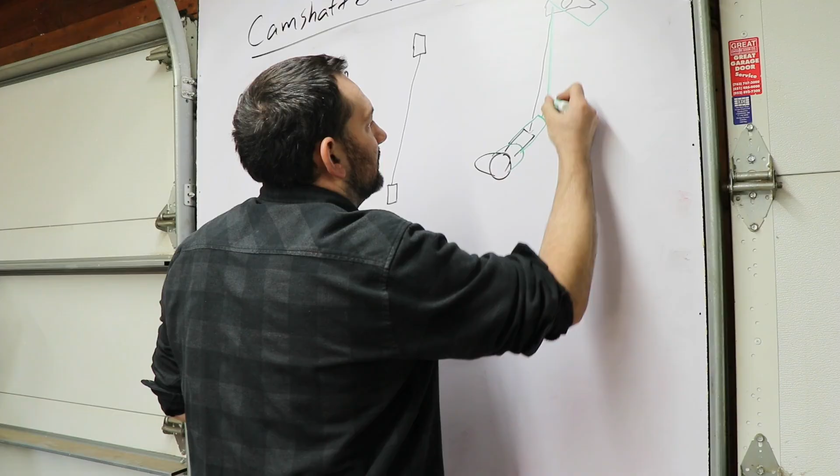But the big thing is because the rocker swings through an arc, the angle changes during the lift. And because your lifter is moving up and down on your cam lobe, as your cam lobe comes around, it moves to a different position. If we get our cam lobe here, we can end up with a different position. Well, I drew that terribly, but you get the idea - more like that.

But anyway, that's okay. That's what the pushrod's designed to do - it's designed to just transfer the energy and take up any alignment changes as we're transferring that energy into the system to open the valve. That being said, they're very prone to bending or deflection. Obviously they'll bend to be a permanent deflection - like if something broke and it jammed, your pushrod will fail. But it does deflect, especially when you get into these big angle situations. Your pushrod is more likely to deflect, and deflecting pushrods lose valve lift.

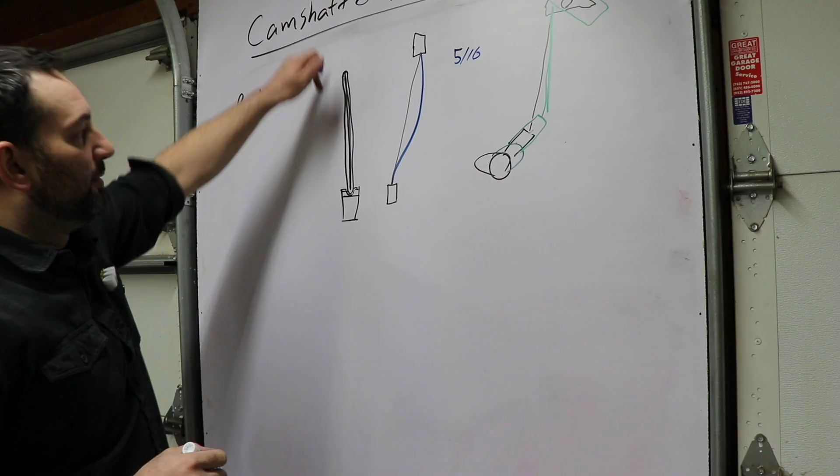So typical stock size pushrods are going to be 5/16 diameter. Not all pushrods have the oil hole. The oil hole is just for our oil coming into our lifter, and then getting in here for the hydraulic will actually be pumped up - that's how we get oil up here to lubricate our top end, or rocker arm, or springs, all that stuff. I say springs not because they need lubrication to function, but because they need lubrication to be cooled. Springs are metal being constantly deformed, and that deforming makes friction and it makes heat, so we need to cool it with the engine oil.

Upgrades, because we don't want this deflection in our push rod, can be going to a 3/8 push rod, or even a 7/16 push rod. There's 1/2-inch push rods out there. And I believe even some NASCAR or Pro Stock stuff uses a 5/8 push rod.

That's all just to increase the rigidity and reduce the deformation or flexing, bending of the push rod that then reduces valve lift. In this situation, the rule of thumb and the obvious choice is run the biggest push rod that you can fit.

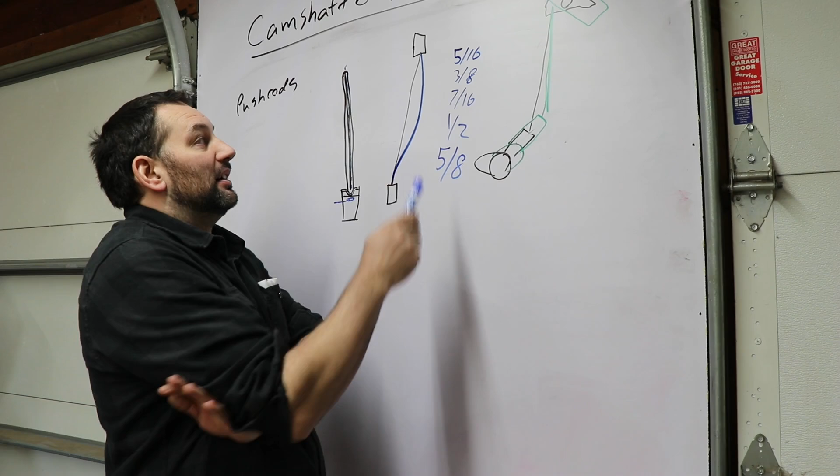In most applications, getting up to a 3/8 away from the 5/16 isn't a problem. You might start running into issues where we're rubbing on other components, mostly the cylinder head, because depending on the size of the opening for the push rod in the cylinder head, and because the rocker swings through an arc and the lifter moves and that angle changes, it might just end up rubbing or contacting in one tiny little spot. It might rub along the whole length. You don't know, and you need to check that kind of stuff.

I've run a 3/8 push rod in almost every one of my personal engines that I race. 5/16 is totally okay for a street cruiser, low RPM type setup.

That's the other thing. RPM makes all of this worse. Everything about the valve train, like we've talked about the harmonics from the crankshaft going up and causing parts to break. Well, they're causing parts to break because as RPM goes up, there's harmonics in all of these parts too. And if all of those end up collecting in one part at one point, that's when things can break.

But the other thing is the amount of cycles that all these parts go through. They have mass, they have weight. An object in motion wants to stay in motion, and when you start telling things that they need to go up and down, so they're changing directions, and they're accelerating and decelerating, and all of that is being measured multiple times per second. And the higher we go in RPM, the more times per second that's happening. The milliseconds that all those parts have to get the job done becomes smaller and smaller and smaller. The stresses and the harmonics go up big time.

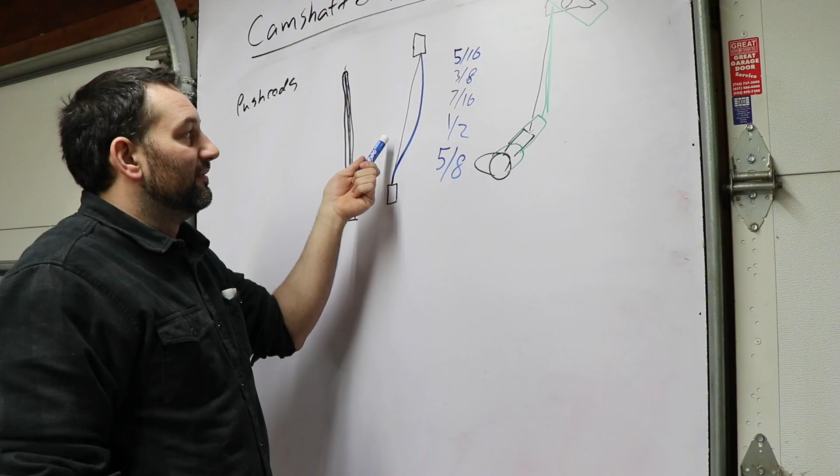And the more rigid we can make these parts, the less they're going to deform, and the more of that lift energy that's going to get from our camshaft to our valve. But yes, the stiffer the push rod, the better.

And related to our oil hole, coming back to our oiling system video, the push rods is one of the places where you can meter the oil to the top end. So long as your oil to the top end is supplied through the push rod, you can get restricted push rods that have typically a 40 thousandths hole in them versus the standard 80 thousandths hole. So you're just reducing the amount of oil that can flow to the top end via the push rods.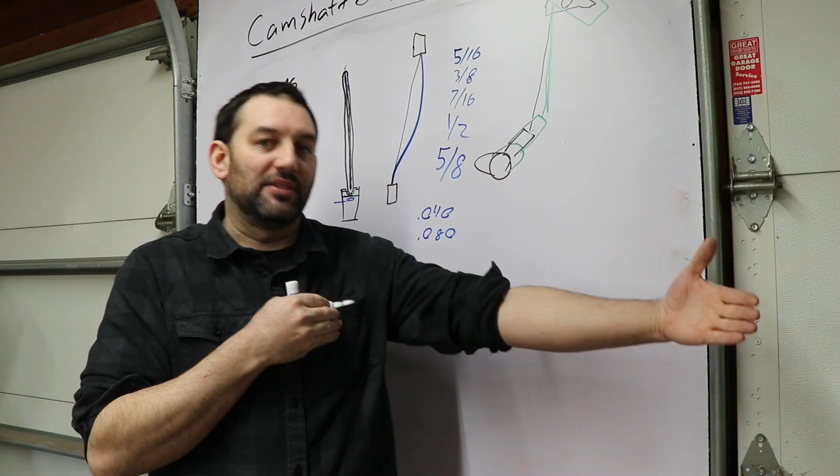Depending on the engine, it could also be done with restrictors in the oil galley that supplies the lifters. And I'm talking each individual lifter from a main oil galley, not the main oil galley itself, because you don't want to restrict it at one point that supplies everything down that side of the engine. You want to restrict it just at the amount getting to the lifter and going up to the top end.

And as we talked about, our hydraulic lifter versus our solid also requires more oil, especially at the lifter, but we can still restrict it in the push rod, and we're going to have plenty of oil in our lifter. But if we're on a solid lifter, we can restrict it before the lifter, because the solid lifter doesn't need that oil supply to make the lifter function properly. So all we're doing is lubricating the bore that it's in and supplying the top end, so it can be restricted prior.

Now moving up, we got our rocker arms. And if we're overhead cam, this is where that might start coming back into play if we have a cylinder head that does utilize a rocker arm. Now rocker arms have a ratio.

Typical stock small block Chevy one would be a 1.5 ratio. Most other engines use like the Oldsmobile's a 1.6. Big block Ford is like a 1.73. There's just, you can buy rocker arms in all kinds of different ratios as well. Now what that ratio is referring to is we've got a pivot point of our rocker. We have the point where the push rod comes in.

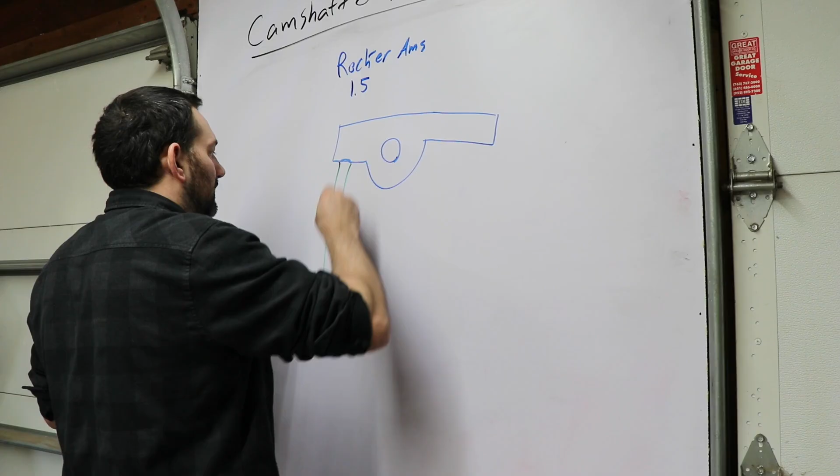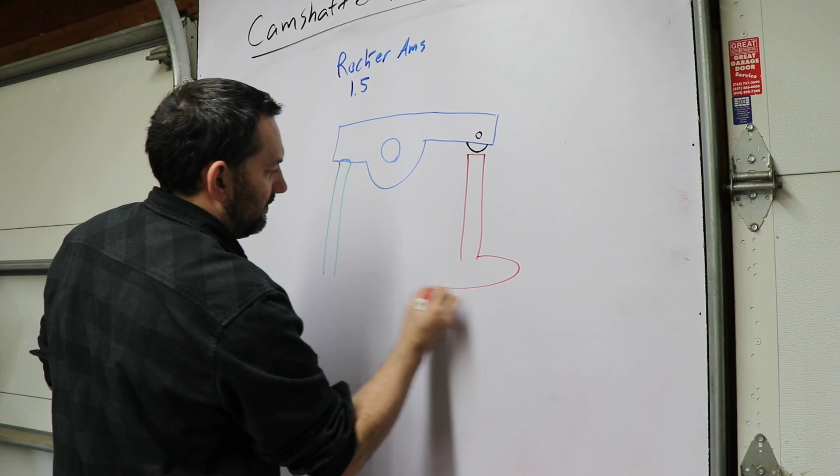So now our push rod comes in over to our rocker pivot, and our rocker pivot over to, if it's a full roller, our contact point with our valve. So the rocker ratio is that push rod distance to the pivot point to our valve contact. So in this case, if it's 1 inch from the push rod to the pivot, it's going to be 1.5 inches from the pivot to the valve contact point.

So what this also means is that if we've got a, say, 400 lobe on our camshaft, which is gigantic actually, we're going to multiply it by the rocker ratio of 1.5, and that's going to be a 600 lift at the valve. So we've got 400 of movement on this side, makes 600 on this side.

Now, typically cams don't have lobes that big. Usually they're somewhere between 200 something up to 300 something. And that's just kind of based upon our camshaft and the way the cam is designed. We want as big a base circle as we can get, but the lobe can only be so big and still fit within the bore that the cam gets installed in. We want that bigger base circle because it makes the cam core stronger, and our spring pressure and all the forces are pushing back down on that cam. So the stronger the cam is, the less the camshaft itself deflects inside the block. But we'll get into that a little more later.

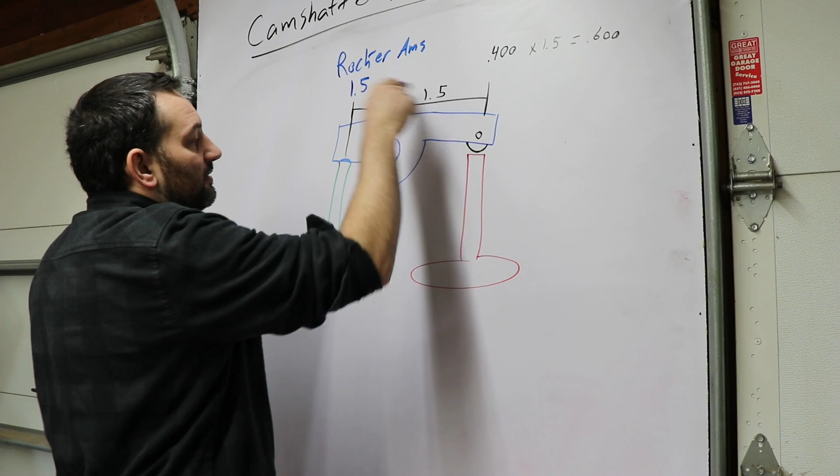But anyway, this is our rocker ratio. And by changing our rocker ratio, we can change our valve lift without changing our camshaft. All that'll be doing is, if we're looking at our cam specs, we can increase the lift, which increases the area under the curve we talked about, but we are not changing our advertised duration, we're not changing our at-50 duration... well, we are changing our at-50 duration by a little bit because we're getting to 50 quicker due to our higher rocker ratio. It's not going to be a ton, but it is a little bit.

So yeah, the advertised duration does not change. Our lobe separation doesn't change. Our overlap doesn't change. But the area under the curve at overlap does change because we're at a higher valve lift while we're doing it. But this, again, is pop the valve cover off, change the rocker arms, reset them. This is something that can be back-to-back dyno tested in 20, 30 minutes.

But it's not really typically something you normally do, because normally you should probably just know what rocker ratio you're planning on using from the get-go. More or less it's because you're picking a camshaft you want, and you're picking a rocker ratio to utilize as much lift as you can given your cylinder head and spring combination, because more lift is more power, kind of flat across the board. I understand it's very much of a generalization, or sounds like it, but at the same time, more lift is more area under the curve, and that means more potential airflow.

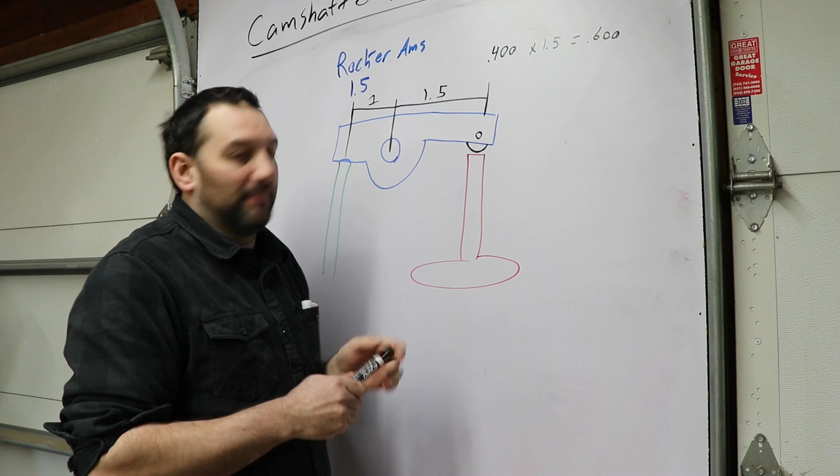That said, there are some extremely low quality full roller rocker arms out there. You should be able to identify these by brand and by the weight, visually how they look. If you've ever had a cheap rocker arm and a quality one in front of you, in your hands, it's a night and day obvious comparison. You can tell just by the quality of the way the bearing and the roller tip feels. You can see that the anodizing process was a fast job on poor quality aluminum versus one done on nice aluminum and done properly. It's just visually so easy to tell the difference.

If you want to know what the sheety ones are, pretty much anything with the Proform label on it sticks out like an absolute sore thumb as a poor quality rocker arm. The price should tell you that too, when you can buy a set of rocker arms for $180 versus everybody else's quality name brand rocker arm at $450 or more. Should be pretty obvious you're paying for what you're getting at that point.

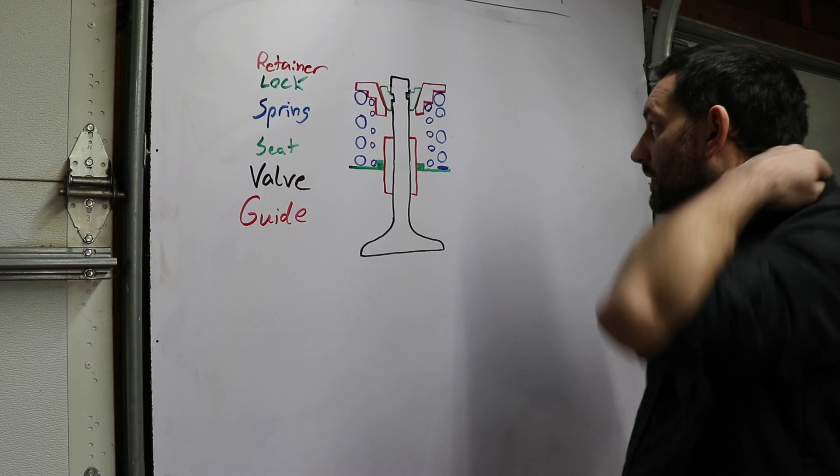So if we cut our entire valve spring package area in half, this is what it would look like. Color coded everything so it makes more sense. We've got our valve, the guide it rides in the cylinder head, the spring seat, the spring itself, the retainer, and our valve locks. The valve locks lock into this groove in the valve, with a taper that locks the retainer in, held in place by spring pressure pushing up on it. The guide controls our valve movement into a linear line, and our rocker arm acts on the tip of the valve to push it up and down for opening and closing.

Our valve itself can be made out of several different materials. Most typical ones are a type of steel alloy or stainless steel alloy. We've also got titanium and Inconel as options as well. Obviously, the titanium and Inconel are very expensive. The Inconel is designed around extremely high temperature applications. The titanium is the lightest weight of them all by a large amount. However, titanium tends to get beat up, but it is very good for very high RPM applications to get the weight of the valve down.

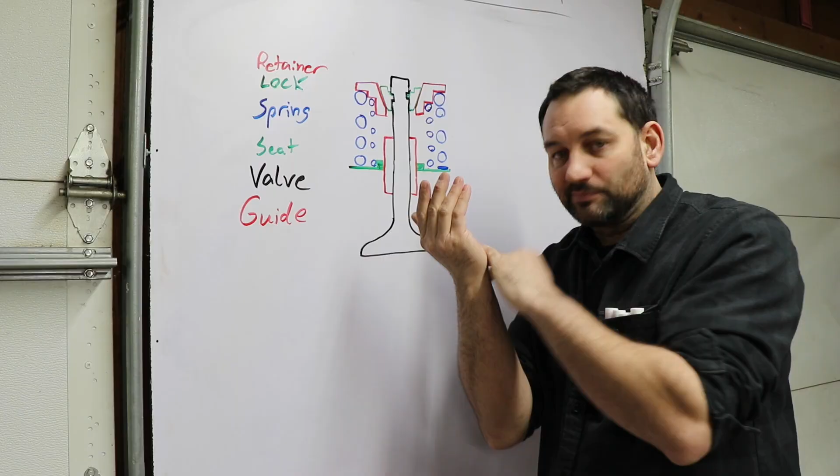Really, there's triples where there's yet another coil spring in here. There are springs that have a damper, which is like a flat spiral kind of thing, in pretty much any high performance application. If you're buying a set of springs and it has those, take them out and throw them in the garbage.

They're meant to dampen the harmonics of the spring, but they also generate a lot of heat because they're a flat surface that's basically rubbing on every single spring coil as it goes up and down. They add a lot of heat into your oil system, and the benefits, whatever.

Typically you're going to end up going with a dual spring setup on anything that isn't a flat tappet hydraulic camshaft. You get into a solid flat tappet, you need more spring pressure, you're probably going to be in dual territory. That territory of spring pressure is also the same for a hydraulic roller, and when you get into solid roller you need a lot more spring pressure. This all comes back to the aggressiveness of those ramp profiles on those camshafts. The more aggressive it is, the more spring pressure you need to keep control of the valve train.

The heavier all of your valve train parts are, the more spring pressure you need to keep control of your valve train. A good example of this is my Oldsmobile engine that I've been racing for the last couple of years. I originally picked out that hydraulic roller cam using a solid roller lifter, and we picked out a spring that was for a typical generic hydraulic roller camshaft spring pressure.

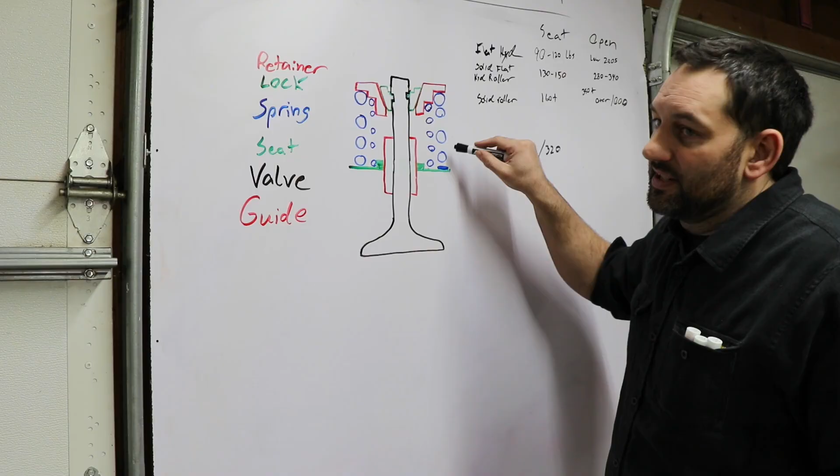And at this spring pressure, I ended up fatiguing the valve train system. I'm guessing it's the spring that got fatigued, but the spring itself didn't fail, the valve failed. It probably failed because of problems with the spring pressure, or the valve being too heavy, and I ended up cracking about that much of the intake valve off.

I got extremely lucky where this piece dropped in the cylinder, dinged the piston twice, and then got back up above and got stuck in the intake.

Extremely lucky on my part, because I still drove it another 2 miles halfway around the track to exit, drove it to my trailer, parked it, tried to diagnose what was wrong, later moved it to show it off for the evening, drove it back to my paddock, tried to diagnose it more, then stuck it in the trailer, brought it home, started it up, backed it out of the trailer and pulled it into the garage before I took it apart and found that chunk. Extremely lucky on my part.

But after looking through and seeing that nothing looked wrong with the springs, retainers, locks, and all I had was the one valve failure. The rest of the valves looked okay, but I was at the point I didn't trust it anymore on any of the valves.

After looking through what I had, I determined that the spring pressure was too low, and I probably lost control of the valve enough that it ended up cracking because it was floating a little and slamming shut back against the seat. It kept doing that until it fatigued the head of the valve to the point of cracking.

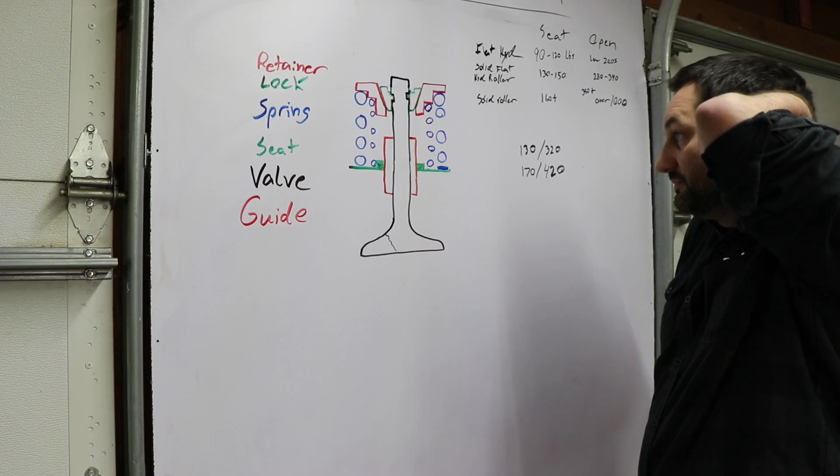And I've since been to Road America, I think, twice since then. The first time after this failure that I went back, the car ran amazing all weekend. I think I did like 130 miles, and it was awesome. It was probably one of the best weekends I've had at the track in just raw enjoyment of driving the car. It was great because I wasn't without problems, but it did wonderful, and I had so much fun that weekend, but no engine problems.

And that's where it cycled back to: keeping your valve train under control is so important. That is why you need quality parts in the valve train, and to have all of the parts be the correct parts, you need to keep control of the rest of the parts.

Another thing to consider with these spring pressures, as far as I'm concerned, is it also has a lot to do with the amount of lift. If lift goes up, spring pressure should probably also go up. As we increase the lift, we're increasing the momentum, or the speed, at which all of these parts are moving. We need to be able to rein it back in and make it reverse direction in milliseconds. And the higher the RPM, the smaller the time frame we have to do that, which means we need more spring pressure to counteract it and get all these parts to change direction and start closing again.

Now, why these camshaft recommendations are in these ranges also has a lot to do with the lift. It's how aggressive the profiles are, but the profiles are getting progressively more aggressive because they're also getting to higher lifts as we go down this route. As an example, if we're doing a hydraulic roller and it's, say, 550 lift, that's not a very aggressive hydraulic roller. We can be on the lower ends and not have much of a problem. However, if we have a hydraulic roller at 650 lift or more, that's getting pretty aggressive for a hydraulic setup.

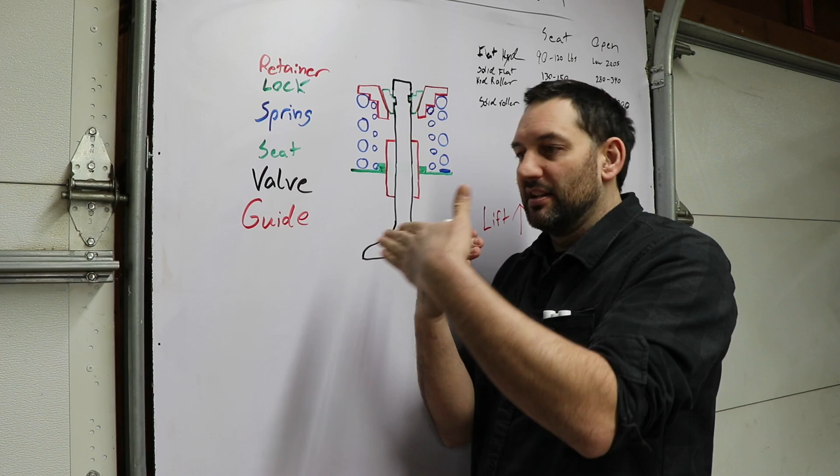The sonic boom is from all the sound waves stacking on one another till they just release. Same deal with breaking parts and harmonics in an engine. If everything's building up, it's going to hit a breaking point. So all together, we want to keep control of our valve train, because that's how we're not going to break parts.

Now, as far as the hard parts themselves, locks and retainers, they need to match each other because they come in a couple of different sizes. There's like a stock small block Chevy style lock that's a 7 degree. What I've drawn up here would be what's called a super lock, and that's a 10 degree. There's also what's called a super 8 degree, which would be wider like the 10, but it's an 8 degree taper, and that's just the taper between the two.

The different lock angles need to have matching retainers. I'm not well versed in what kind of variations there are in more import overhead cam style engines. It really doesn't matter what the actual degree is. The degree is just making a wedging effect to shove the locks into the groove of the valve and lock everything in place.

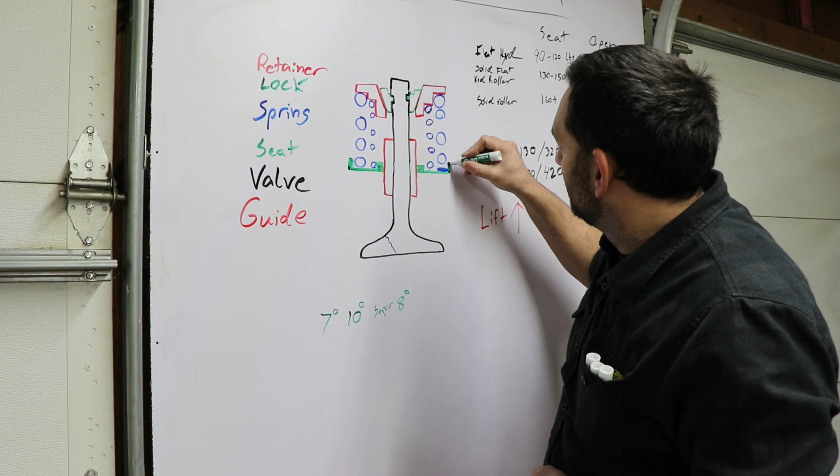Same goes for the seat on the bottom. The one I've drawn is an inner spring seat, so it locates off of the inner spring. We want a nice fit there. There's also a second style that's an outer, which would locate the outside of your spring. It's going to be one or the other. Same thing there - you want them to fit nice because we want our spring to be held in position. We don't want it moving around inside of those parts because we just don't need that movement. It kind of just encourages everything to be out of control.

Things to be aware of when picking out these parts: you need to make sure that they fit together properly to have it done right.

There's also different types of grooves. The most typical is a square groove, based off of small block Chevy and Ford stuff that most manufacturers used. There's also a radius style - if I'm drawing the valve, it's going to have just a single radius in it, but there's also a dual and even a triple, depending on what the factory one was designed around.

I think the single round would be - I think LS's are that one now. The dual round, I believe some Mopars used back in the day, and Caterpillar uses that lock on some aftermarket Caterpillar stuff. And then the triple would be, I think, a modular Ford uses a triple.

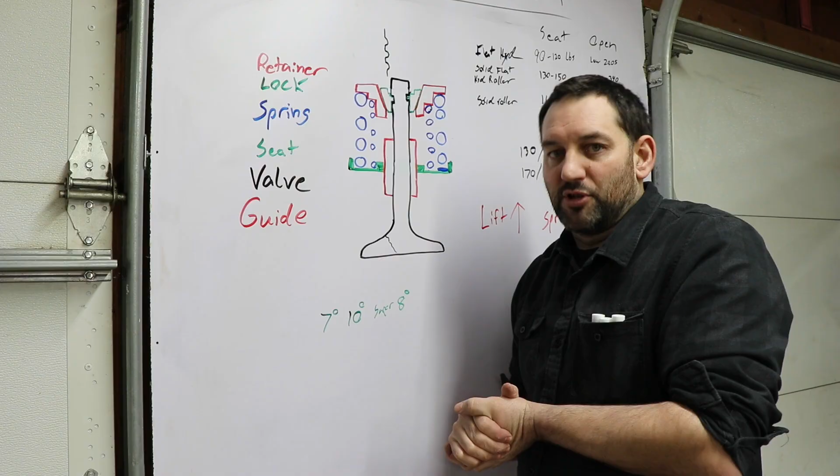Versus if you're building a typical pushrod V8, you kind of got sky's the limit - you can order parts in any way, shape, or form that you want. I really don't see that there's a benefit one way or the other. I think the radius groove argument is you'd have no sharp corners, so there's no stress risers in the valve up here at the tip. Which is the truth, I mean, but I don't know that you're going to run into much situation where that's ever going to be a problem that rears its head.

I feel like this is a good spot for ending this video. I've been out here filming, I feel like, half the day already just for this video. There's definitely so much more we could try covering - even just part of the valve train, getting into the nuances of each individual part. I could probably be out here for another couple hours, but I'm going to save a lot of that stuff.

Some of it we'll get into, especially when we start talking about cylinder heads. Part of that video, I'm also planning on doing some flow bench and cylinder head porting stuff, and we'll get into a lot more about valves, angles, back cuts, the head, port sizes, and all kinds of crazy things there.